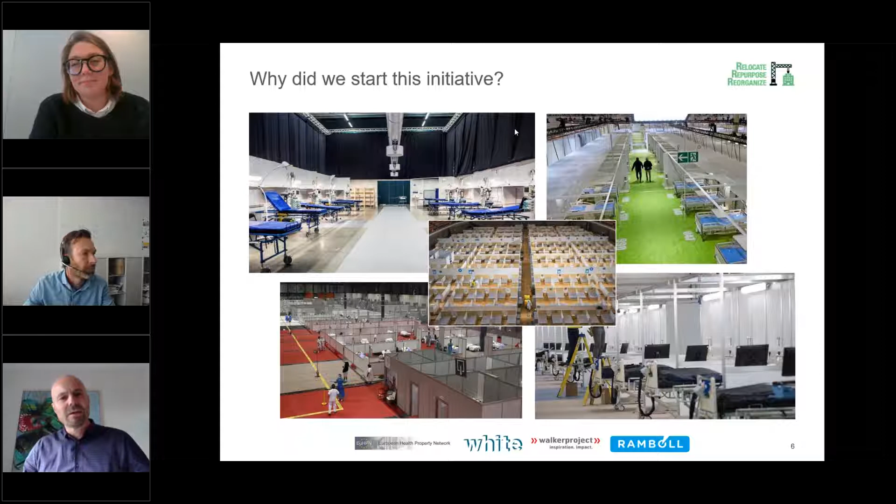If you go to the next slide, Michael, I will give you a brief introduction of how it really started. Back in March, when the pandemic started to pick up and everybody was running around, knocking on doors, trying to help out locally, we sat down and thought we really wanted to make some kind of a different initiative that would be of a more international scale. In this, I started to discuss how to do this both internally, but also with Walker Project and EU HPN, Jonathan, who both helped out in maturing this idea.

The overall idea was basically trying to make some kind of guideline to prepare and build facilities for the pandemic. I'll just say a few words on how this organization, or project, is built.

We are four parties in this. The EU HPN Walker Project was the initial one, but White Architects approached us and said this is a great initiative, we would like to join the team. Since we really needed different perspectives and approaches to clients, hospitals, and the general environment, we thought this would be a really good and diverse project team.

The funding for the project is given by the Ramboll Foundation, who supports society initiatives. So this is basically a completely non-profit initiative, and this is what we are trying to focus on.

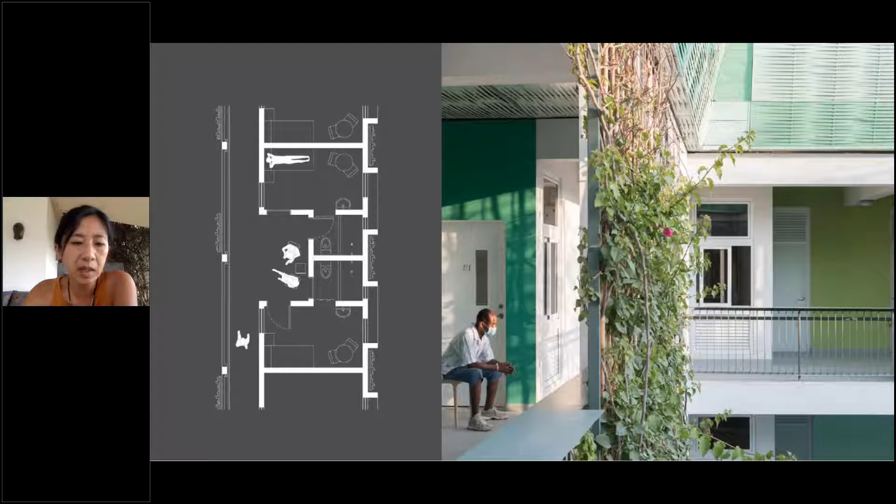We'd also built a cholera treatment center in Haiti, a waterborne disease that broke out there after the 2010 earthquake, as many of you are aware. We built an underground wastewater treatment system to clean and filter the water and ultimately stop the cycle of reinfection that was coming up from treatment facilities.

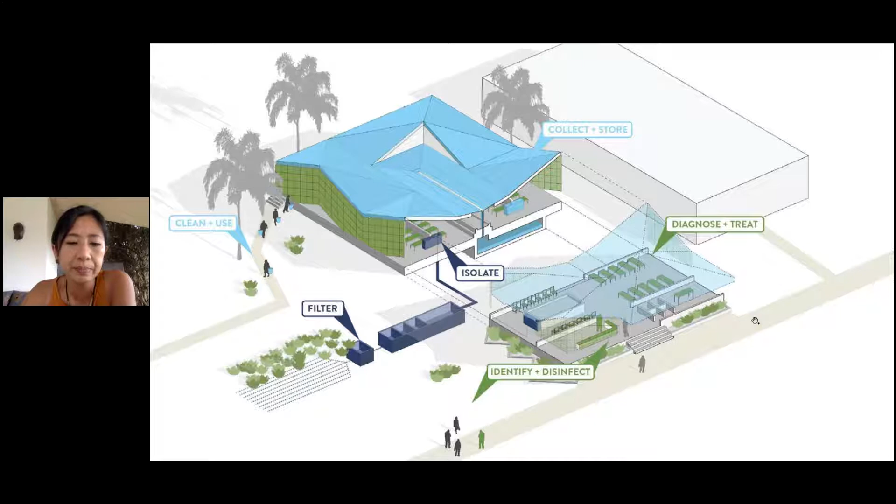The design of the space itself sought to bring light, air, and greenery into an otherwise very miserable and undignifying disease. Then in Liberia, after the Ebola outbreak, we worked with the government to build a 250-bed hospital, which was designed not only around air and water, but around rebuilding the public's trust in the health system.

Beyond those design projects, we'd also been developing spatial research methods, trying to look at how we can connect space and outcomes. We worked with Ariadne Labs, with funding from the Robert Wood Johnson Foundation, on a year-long project.

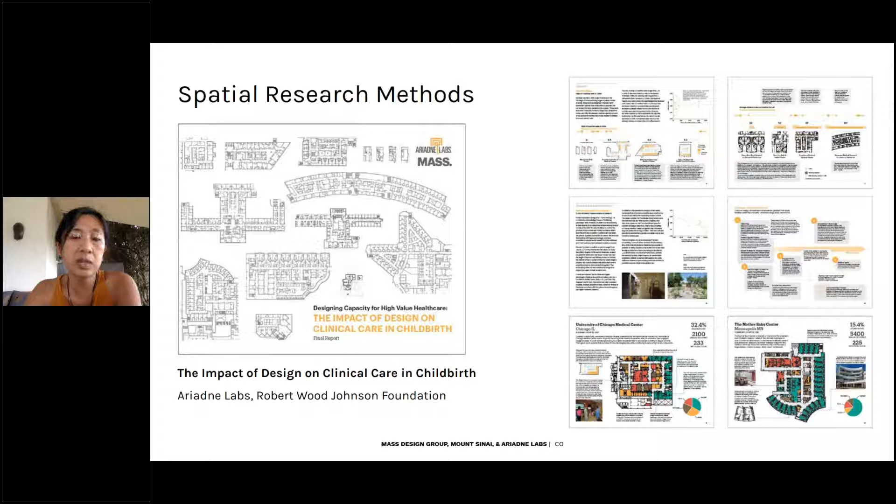This project aimed at looking at whether the layout of labor and delivery units was actually affecting the rate of unnecessary C-sections. Most evidence-based studies in healthcare look at the scale of the room or elements that are very definable, but we were interested in the system forces affecting how clinicians make care decisions. So we were looking at the maternity unit as a whole.

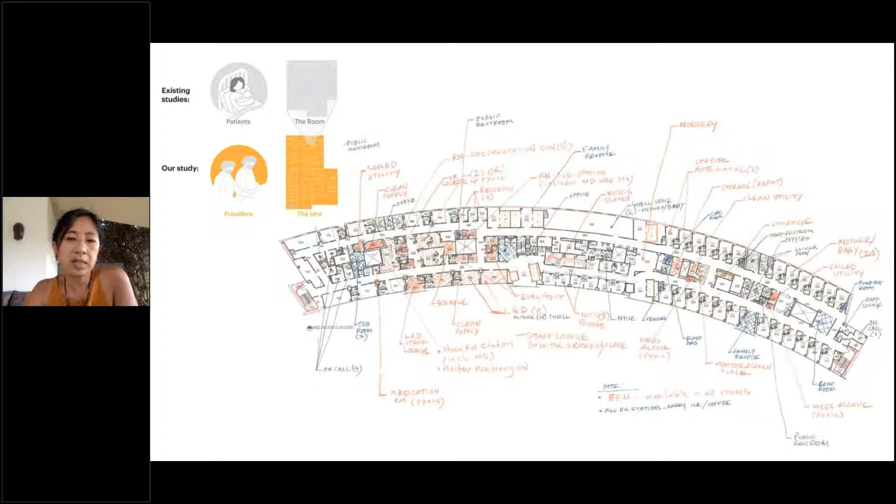We visited and collected data on case studies across the country, and we engaged clinicians to help us visualize the care processes that were going on. That ultimately allowed us to generate testable hypotheses that linked healthcare space design measurements to C-section rates.

We were able to publish the results of our work in some peer-reviewed journals, which we were really excited about. So that was all the background, that was the foundation.

In early March, when COVID was emerging, we'd begun developing some general resources for spatial thinking related to COVID infection control. So when we got that call from Mount Sinai, we were able to start very quickly.

What we recognized was that there were many hospitals implementing spatial redesigns on the fly without much guidance to prepare for the COVID-19 surge. So what we wanted to do was capture quick interventions that were working and share lessons to assist other facilities on how they could be more informed in moving forward.

So what we did together was document how spaces were being adapted by developing quick and nimble approaches to research and collaboration. The question we had to grapple with was, what does evidence and research look like when we're moving so quickly and without much guidance?

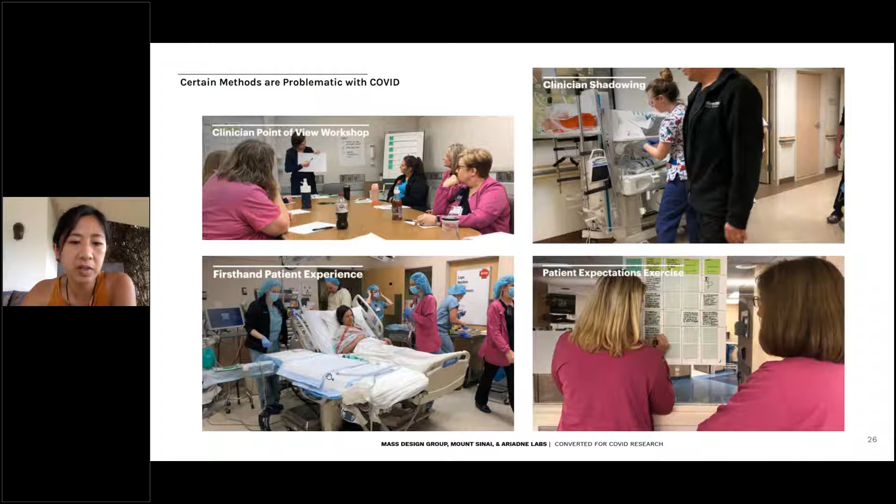We couldn't apply the methods we normally would, which would be clinician shadowing, holding workshops, running simulations ourselves to see how care processes work. In those early months of COVID, as Nicholas Kristof reported in the New York Times, it had been easier to be embedded in army units in Iraq or Afghanistan than to embed with doctors fighting COVID at that point.

So our research study lasted 3 weeks, and it was a rapid response spatial research method that employed a lot of different types of approaches.

Over Zoom, the doctors led us on virtual walkthroughs of active COVID care units, and we had to carefully outline what we wanted to see and have them do practice run-throughs on non-active floors ahead of time, in order to optimize their time on the COVID floors, keep them safe, and not impede the care processes.

Using GoPros strapped to their chest, they also captured time-lapse footage of COVID ICUs, which allowed us to go in and later look closer into the photos of what was going on.

We ran a series of interviews with facilities teams and clinical operations teams, people who were putting these changes into place. And then we worked with clinicians to have them also annotate floor plans to visualize how the spaces were being used.

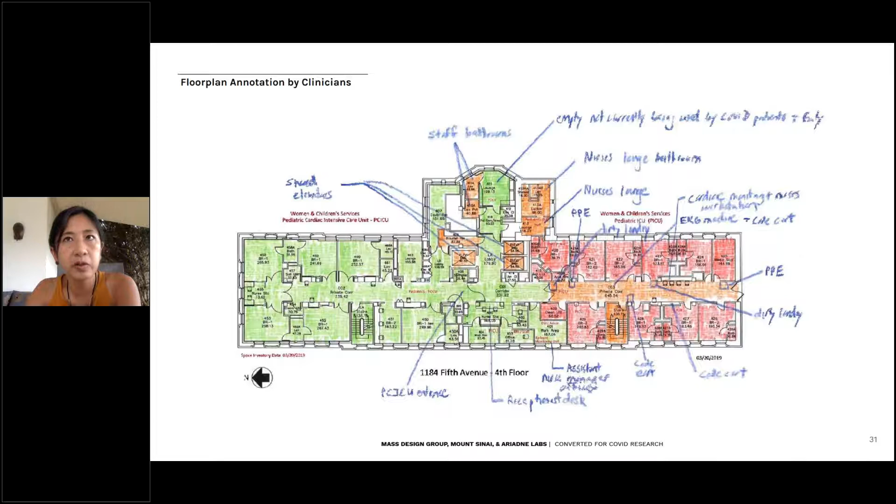Let me just go back to this for a second. I think from a personal standpoint, it was a really incredible and surreal experience.

As I mentioned, I'm located in Rwanda, so due to the time difference, physically I was sitting on nighttime calls in my kitchen, slapping mosquitoes away, and virtually I was touring busy intensive care units in New York City. I think this type of collaboration across geographies, across time zones, across disciplines was really incredible and felt very urgent and of the moment.

What we saw on those phone calls was some really unprecedented spatial change. And we saw a lot of critical care taking place beyond the normal confines of the patient room.

So at that point in mid-March, Mount Sinai had already begun radically transforming its care delivery system. They changed their main atrium, their main lobby, into a 100-bed step-down unit, and then built a temporary 68-bed tent facility across the street in Central Park.

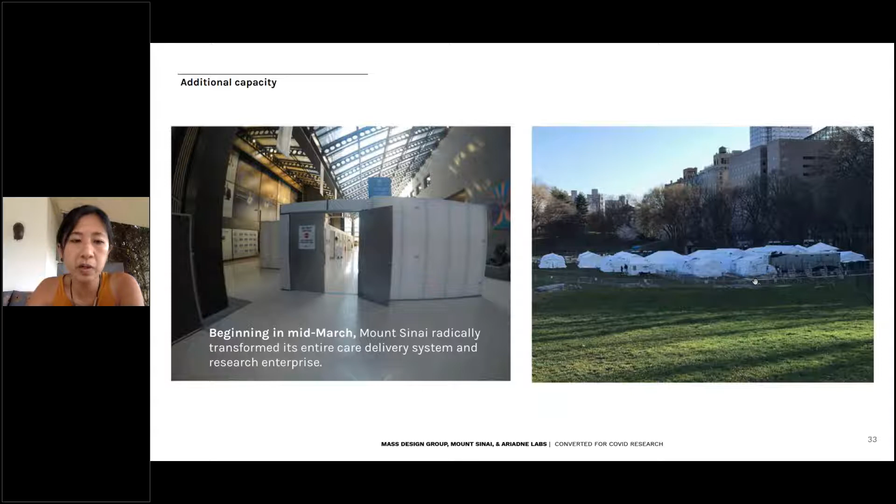And then within their existing ICUs and med-surg units, they transformed 260 existing patient rooms into negative pressure isolation rooms. For this example, in this ICU, the openings had previously been open, so they constructed walls and doors across the fronts of the bays, and brought in large HEPA filtration units set up to directly exhaust outside through custom fit wood panels installed in the windows.

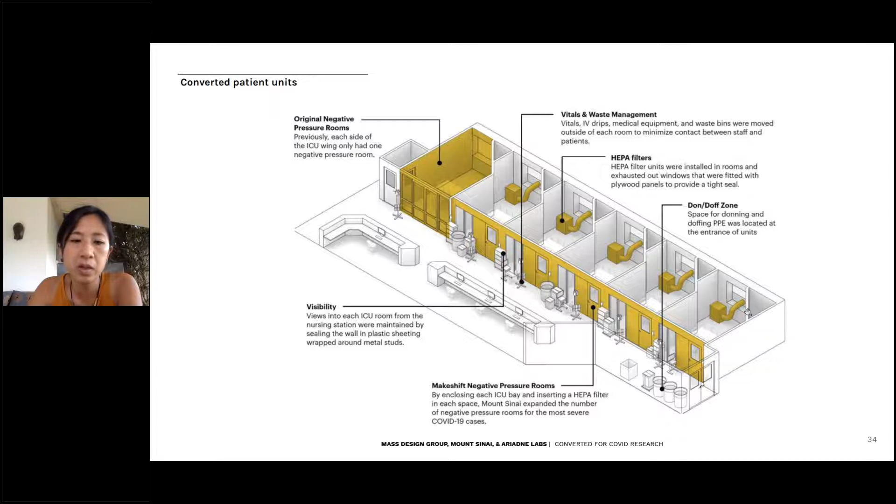The change at which these things took place was really radical. Here's a before and after of just one floor of the hospital showing how 3 intensive care units were converted. The buildings themselves were literally intubated to expel contaminated air.

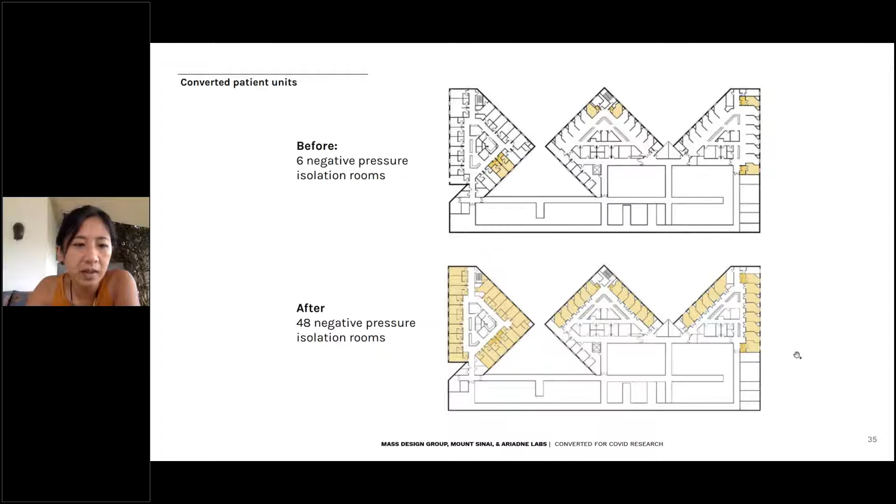I would pause for a moment to recognize the uniqueness of this floor plan, which was designed decades ago by I.M. Pei's firm. So it was an honor to be looking at such a historic piece of architecture.

So what we quickly grabbed onto was that the in-between spaces were really critical. A lot of attention was being paid to the patient rooms themselves, how to make them negative pressure. But all of these hallways were really where we wanted to address risk. In order to minimize clinician exposure in patient rooms while still allowing for that high acuity care to happen, these double-loaded corridors suddenly became the do-everything space.

They accommodated IV poles, patient monitors, PPE stations, waste receptacles, staff workstations, clinician rounding, and a lot of the care processes that had previously taken place in patient rooms were now happening in the corridors.

Many of them, as you can see here, were already narrow, particularly in an urban environment with older infrastructure that was limited. But when crowded with all of this equipment, as well as teams working and making rounds, this didn't create the safest conditions for healthcare workers. We recognized really quickly that enforcing proper infection control protocols in corridors and key thresholds like unit entrances was just as important as in the patient rooms.

So in the end, we looked at 3 different COVID-19 units: an adult ICU, an adult medical unit, and a pediatric unit. We found that amidst the really heroic efforts to transform hospital-wide clinical processes and infrastructure, there were a lot of adaptations that varied between floors and between units.

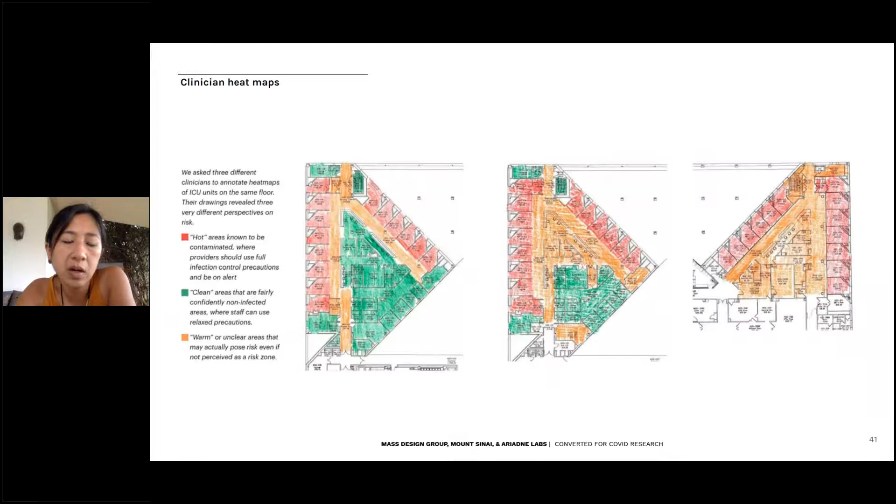So in the rush to expand bed and caregiving capacity, hospitals hadn't yet had the time or energy to develop human-centered design cues to communicate key information and enforce adherence to protocols and create order and confidence. Staff responding to surge conditions are often redeployed to unfamiliar environments with new team members, imagine coming to a new space for the first time with people fully gowned up, you can't tell who they are. Visual aids and design nudges, even simple paint or tape on the floor, can help lower infection transmission by making invisible risks more visible and orienting people, creating spaces that instill confidence and collaboration.

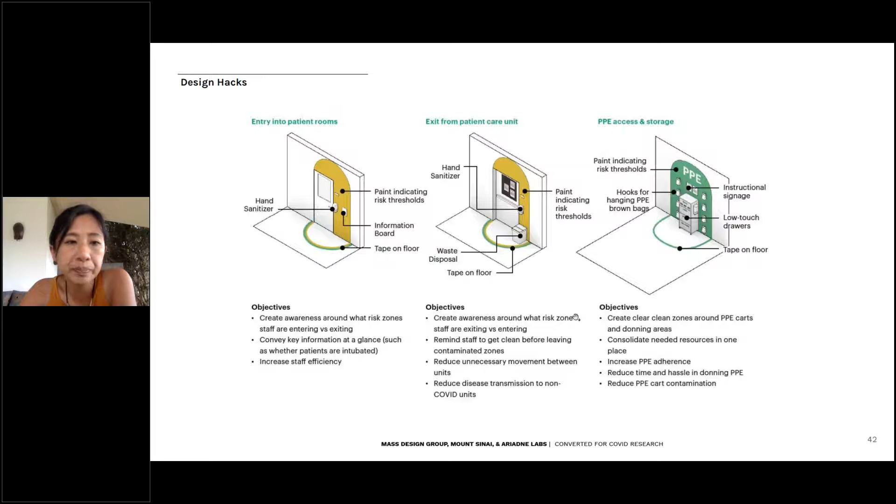This is a research project, and the lessons we took away from those 3 weeks were first, time is of the essence, and as designers we need to mobilize quickly, collaborate deeply, and leverage nimble research methods to respond in unpredictable, constrained situations out of our control. We also acknowledge that space has a vital role to play. The physical environment shapes how people behave, interact, and make decisions, and spatial literacy and design cues are key to indicating risk and standardizing behavior to keep people safe.

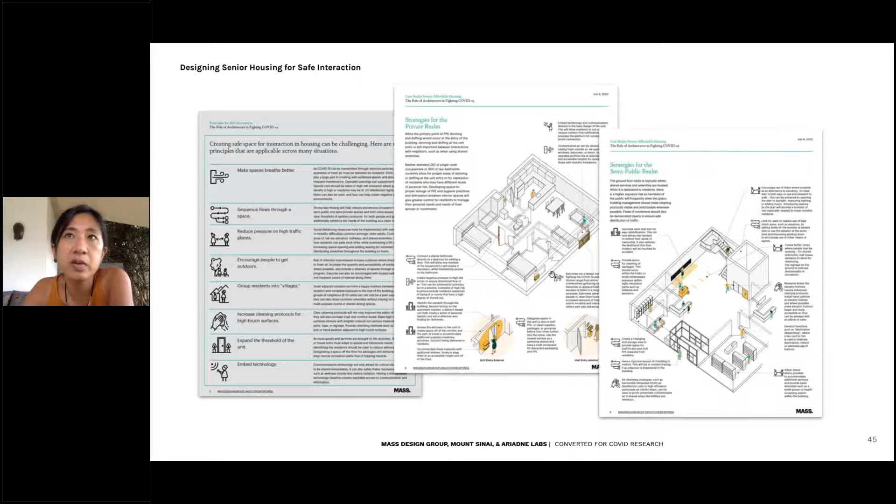After collaborating with Mount Sinai, we published a report of our research, now on our website, and we went on to develop other COVID design resources, including design recommendations for senior housing, hotels, restaurants, museums, schools, and even prisons.

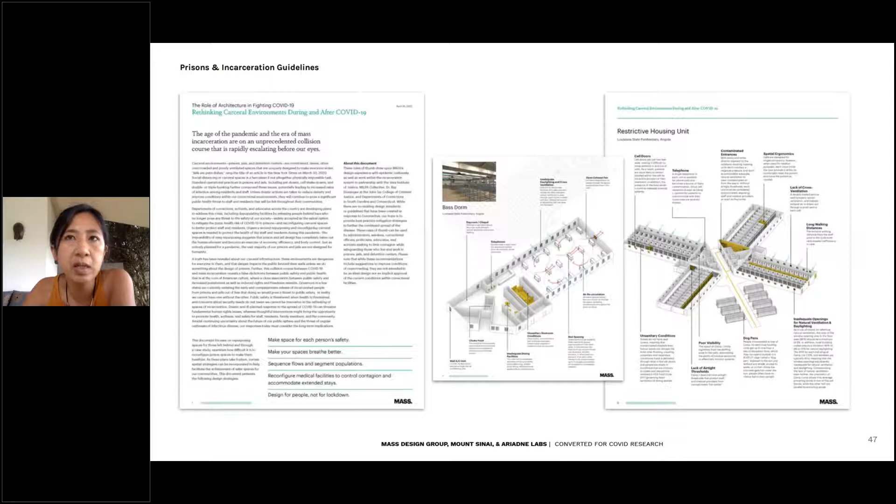Now our team is working to put together a learning collaborative of multiple health systems. We want to look at a broad range of facility types and geographic contexts in different moments of the wax and wane of the pandemic. We want to expand to look at a broader set of care delivery spaces, not just dedicated COVID care units. We want a broader definition of safety beyond infection control, but also communication, morale, and stress management, for all healthcare workers, not just clinicians. Ultimately, we hope to develop clear spatial guidance that can be used globally to transform hospital units in the COVID-19 era.

So to conclude, MASS's motto or thesis since its beginning has always been that buildings are never neutral, they either help or they hurt. As we all acknowledge, COVID brought to light a lot of cracks in our systems that were previously less visible. It revealed issues of equity, how interconnected and interdependent we all are, and that we need to be designing for health in the largest sense of the word. On the plus side, it's also created a bigger awareness of the role of the built environment in keeping people safe.

There's a lot more discussion in general media and among the public, no matter what community or field of work you're in, and people have an awareness of what spaces they feel comfortable in, the density of those spaces, and a tacit understanding of airflow versus stagnancy. I hope we can be optimistic that this will open up a greater appreciation and value for the role of design in all kinds of spaces.

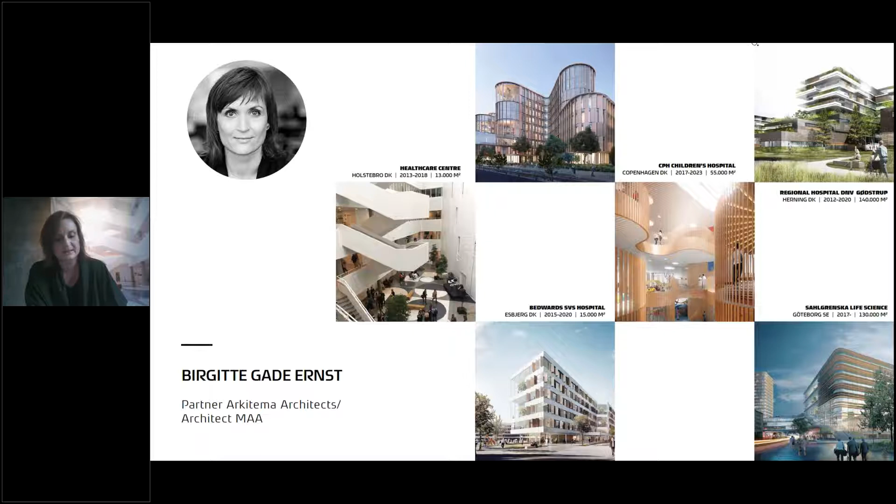My name is Birgitte Gade Ernst. I'm a partner in Arkitema Architects and responsible for our Danish healthcare buildings. We design healthcare buildings in any scale, from new hospitals like the new Children's Hospital in Copenhagen, to life science buildings and healthcare centers. We are Scandinavian, and we have a Scandinavian approach both in our architecture and in the way that we design patient-related design.

So first some background information. In the international press, I've read about the Scandinavian response to COVID-19, and I believe there are 2 reasons that the COVID situation is fairly manageable in Denmark. First, our hospitals are national. They're managed by the regions, but it's one system with a large degree of knowledge sharing, which has been useful in this crisis.

Secondly, as you probably know, Denmark is a welfare state. That basically means we accept quite high taxes in order to secure education, law and order, pensions, and indeed healthcare for everyone. So you can say we have a contract with the government that we pay, and in return they take care of the weak in society. That again means that when the Danes have shown this red and green COVID curve, and I explained the importance to avoid the red surge, to keep distance, to work from home, to wash our hands, we do this by and large because it's part of taking care of the weak. Also, if we fall ourselves, we are sure of help.

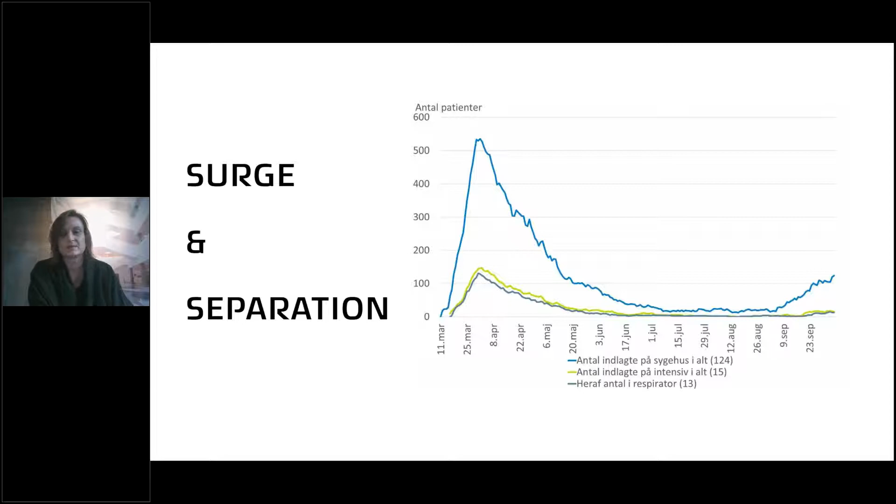So there are mainly two important aspects that we have learned from this pandemic, which is surge and separation, and these are the issues I will talk about. The figure on the right shows that in Denmark, in March, when it was worst, we had 550 COVID patients only, and today it's 124 at hospital, only 15 in ICU care. We have a population of 5.8 million people, so it's fairly manageable, but still we take care.

Regarding the surge, this has not yet been an issue in Denmark. We were warned by what happened in Italy, and we prepared accordingly. So Rigshospitalet and other hospitals quite quickly cancelled a number of elective patients, and also more nurses were retrained to handle intensive care patients.

Interestingly, none of the Danish hospitals were fit to deal with testing facilities. So in order to secure separation, testing tents were set up all around the country, and also here at Rigshospitalet.

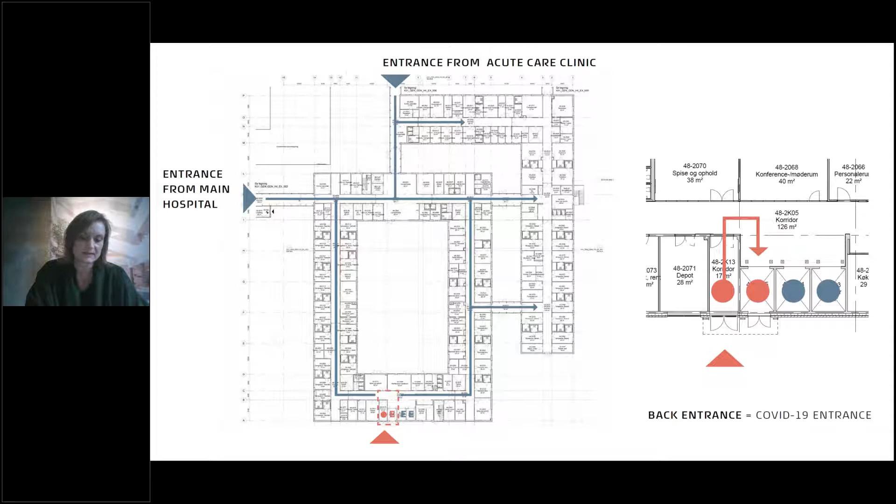You have this blue COVID-free zone. In effect, a tiny part of the footprint of the building is the COVID zone, illustrated in red. And the top floor is now a dedicated COVID floor. In this region, there hasn't been such shortages of staff; reallocation has sufficed. The single bedrooms, normally for mothers and newborns, are now used for COVID patients.

The single bedrooms have an advantage for the patient, as some of the equipment used for allocating oxygen, etc., actually makes quite a lot of noise. Imagine lying there feeling very sick, and it isn't helpful at all to have to listen to a machine that supports your neighbor's breathing. You could be next. So this is a very stressful situation that's avoided with a single bedroom.

So what do we take with us to the next pandemic? Will we build with redundancy to handle a future surge? I think in Denmark that's highly unlikely. Square meters are expensive, and the trend is to optimize and make hospitals as compact as possible. I believe in flexibility, as we've seen in this previous example in Zealand.

Will we design more ICUs in the future? Possibly. Will we have a focus on separation of flows? Definitely. This is something we can learn from COVID, and where we can help hospitals be prepared.

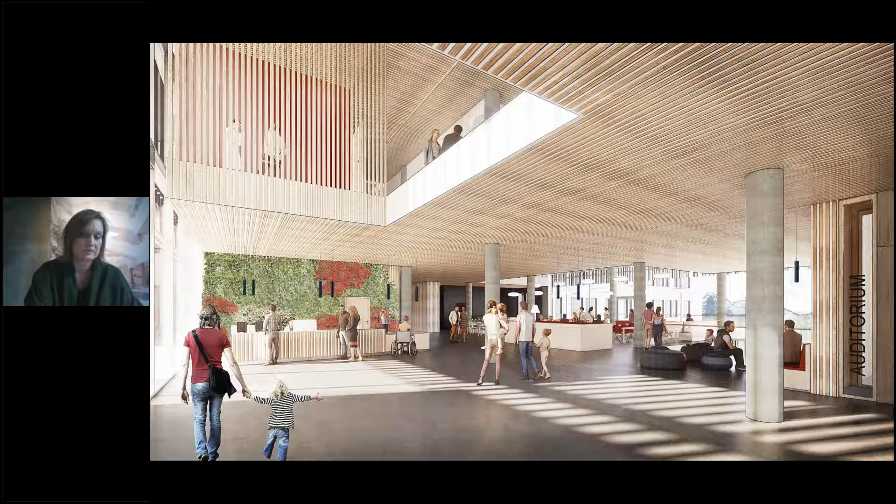Here's an early rendering of the main entrance. On the plan drawing, you see this main entrance top left. It looks like it's at the edge of the building, but the psychiatry isn't shown on this plan, so it's actually in the middle. If you turn left, you're in the somatic wards, and if you turn right, you're at the psychiatry.

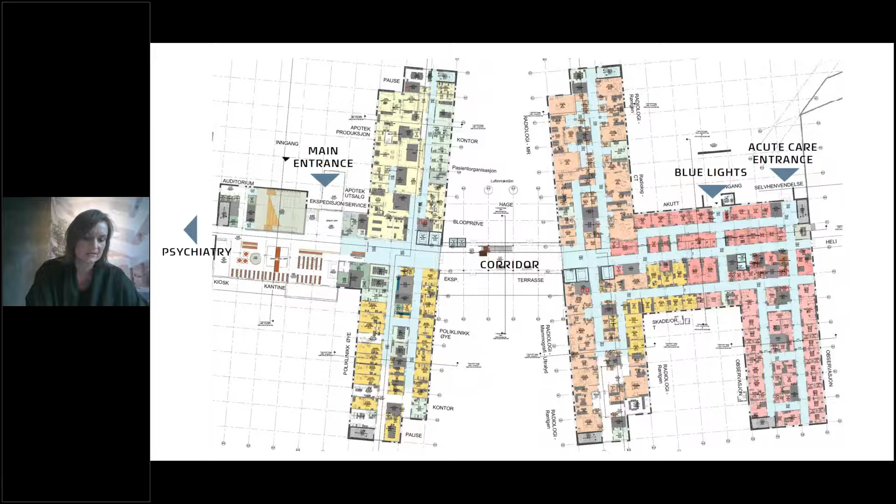To the far right, the pink in the drawings is the acute care, or the A&E, and in the middle you have this corridor connecting the two wings. Now this is the corridor. Notice the door - it's designed to gain access to common outdoor spaces.

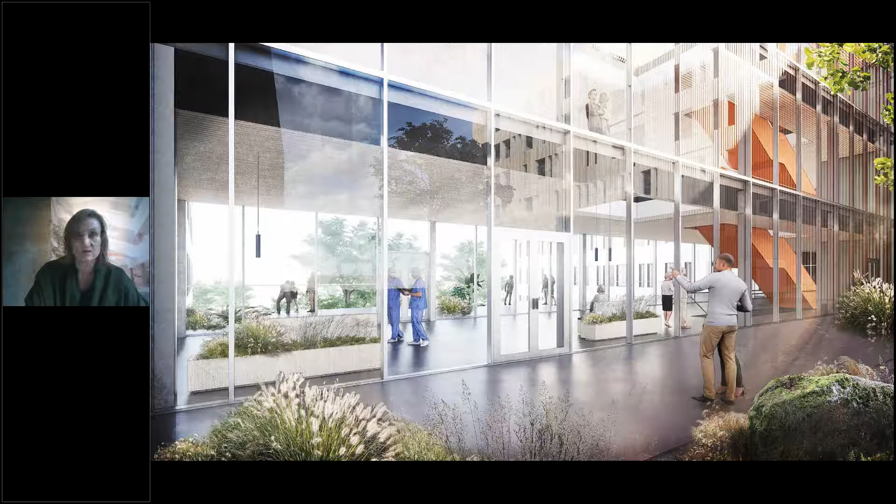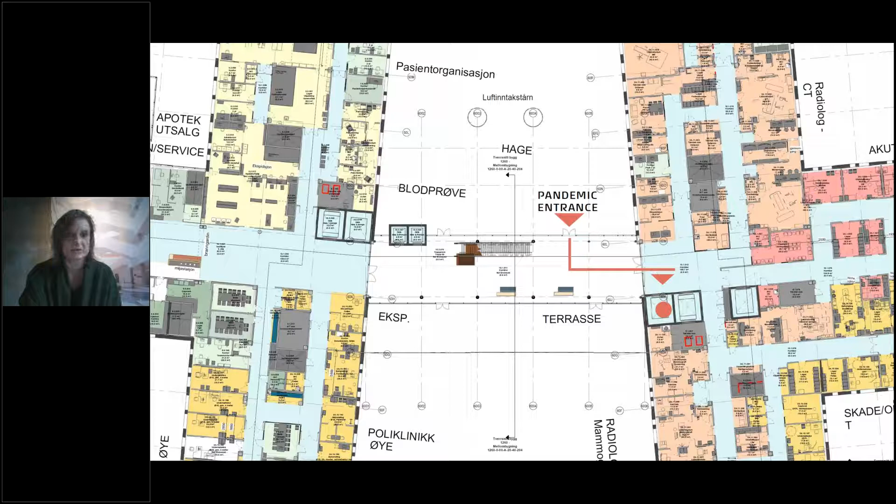It's also perfect for a future pandemic. The door is placed in close proximity to an elevator that can be dedicated to the purpose when needed. In this way, we can easily dedicate a whole wing to a new pandemic - you see the pandemic elevator, the elevators going to the other floors, and then of course the acute care elevator.

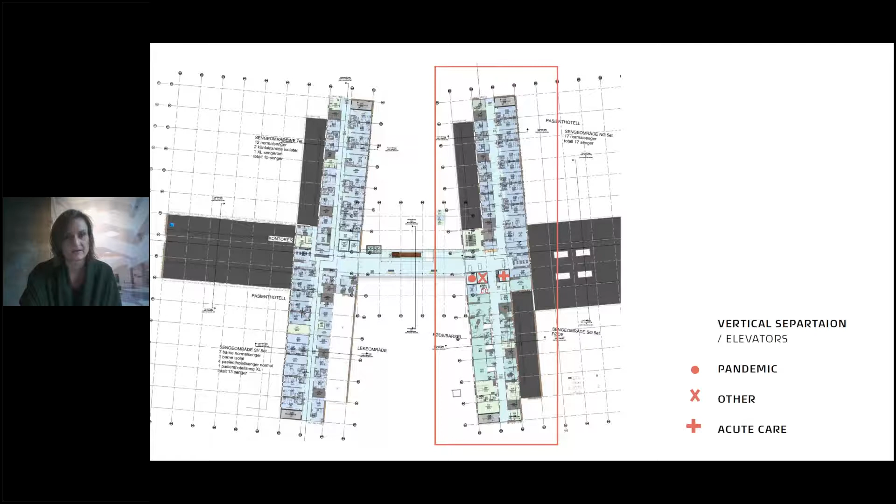And then a seemingly smaller thing, but still you have to embed it in the design from the start. We are currently adding more sinks to our design. Hand washing is preferred to the highly flammable hand disinfection. And this is quite interesting because it's sort of an old school thing. Years ago, we designed more sinks, and now they are sort of entering back into our projects, or at least into this one.

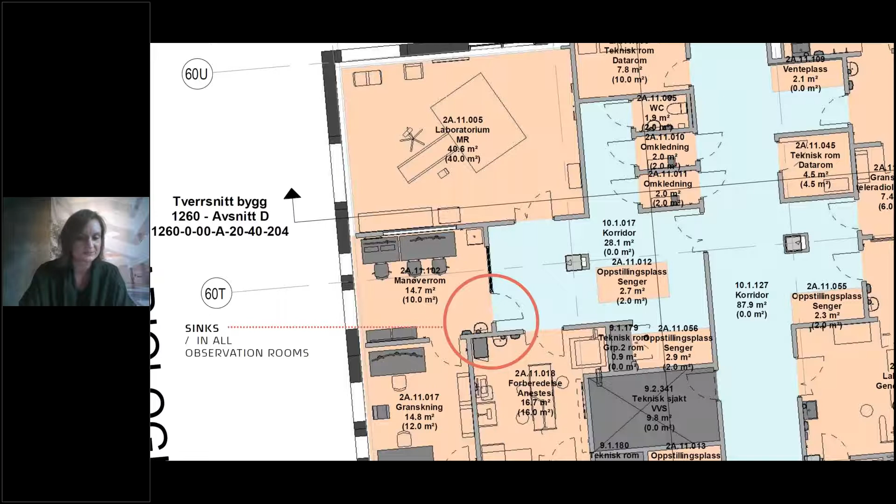COVID behind the scenes. The laboratory staff at this hospital were concerned that working with highly contagious substances, they would unintentionally risk infecting colleagues. Therefore, our initial big open lab space to the left has now been remodeled into 2 separate units and a 3rd room for equipment. So for the future, they can use 1 laboratory for the pandemic laboratory.

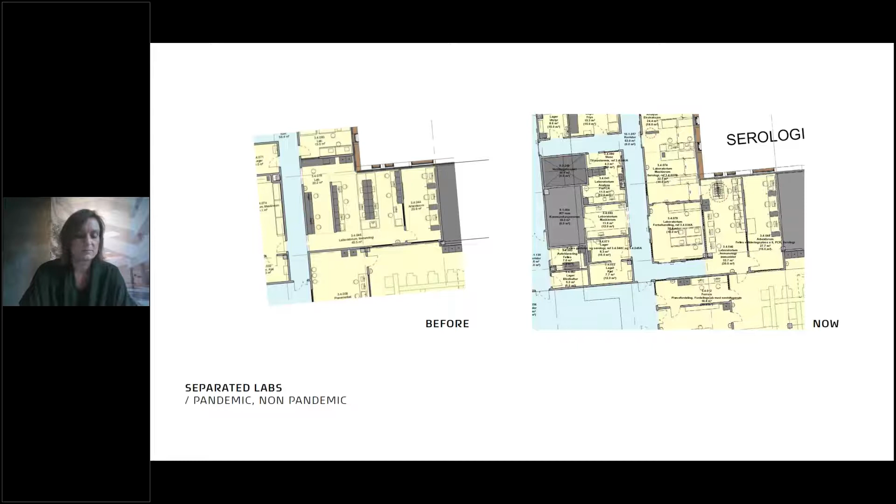So on the larger scale and the smaller detail, if we ask the right questions and use the experiences of the staff from the current pandemic, we architects do have the skills and the tools to help prepare for the next pandemic. Thank you.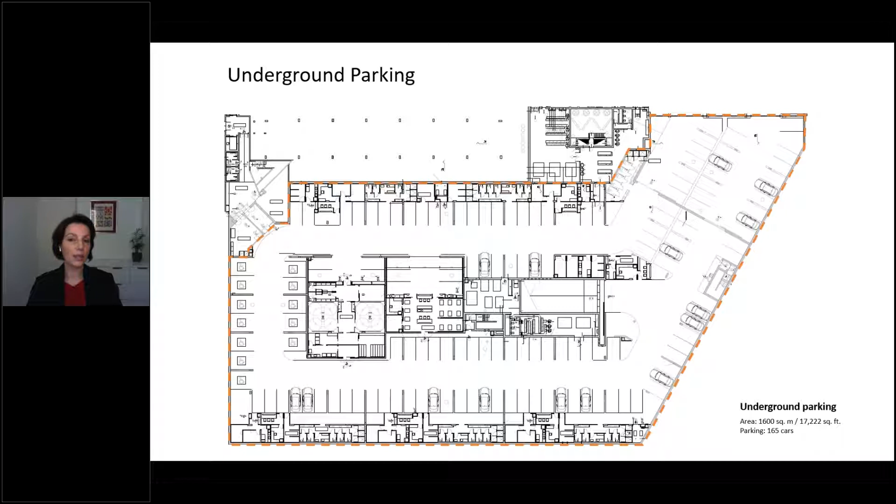As most of the hospitals in Israel, Sheba rapidly utilized in only a few days an underground parking structure that was designed to serve as an emergency hospital for times of war.

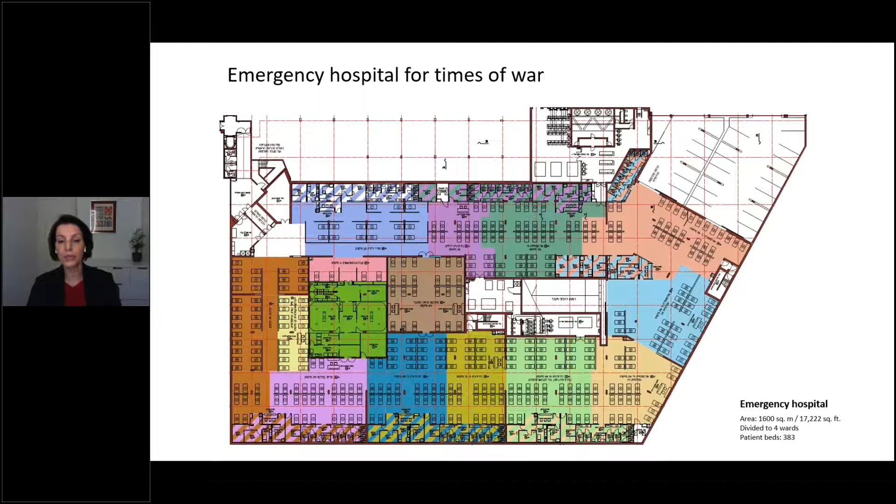Here you can see the layout with almost 400 patient beds divided into different medical divisions, units, and they transformed it into a critical hospital care for COVID patients.

The logic behind this decision was the intent to isolate the coronavirus patients from the rest of the operating hospital units and to save money and time by utilizing an existing structure.

The large side of the parking lot was divided into 2 ICUs with distinguished separation of clean zones and contaminated zones and controlled circulation routes.

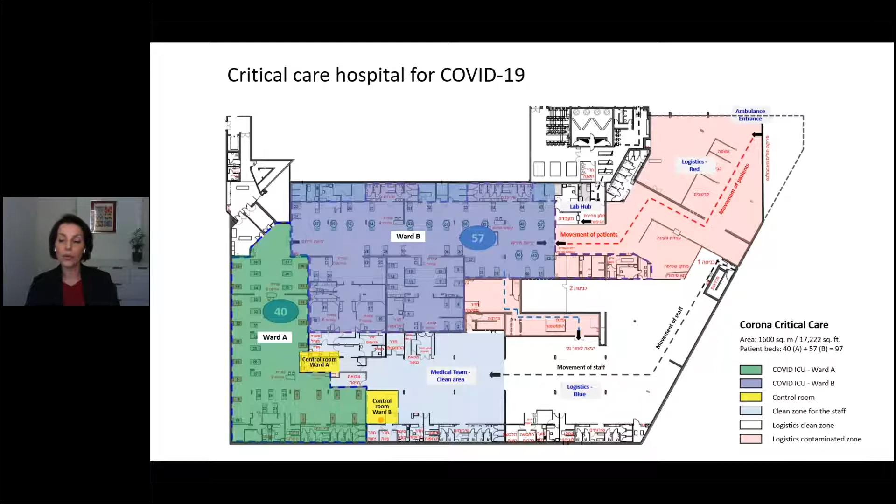The 2 ICUs have an open ward layout with contaminated zones. Ward A is colored in green and Ward B colored in purple. Both of them have a separate control room in the clean area, which you can see colored in yellow.

The control room has telemedicine devices to remotely supervise, communicate, and control the operations of the unit. The units have different models. The control room in Ward A is adjacent to the unit with a big window.

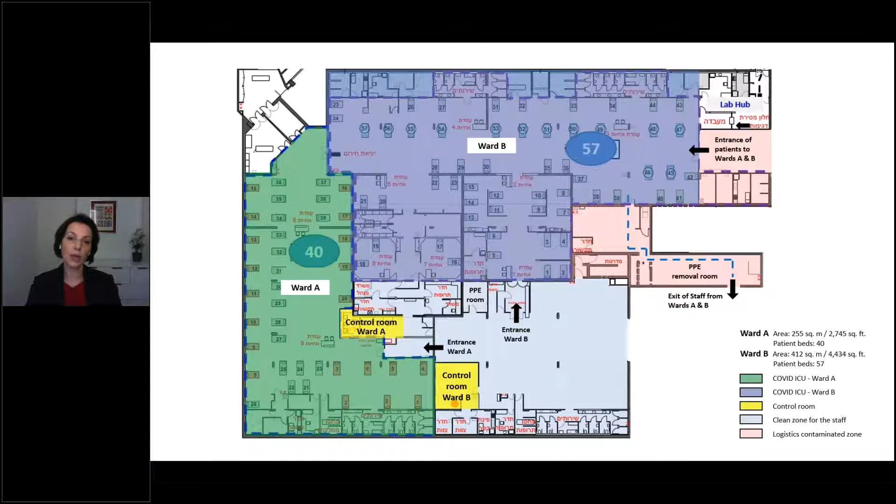The staff was divided accordingly into 2 teams, one working in the contaminated zone with full PPE, while the other team supported them from the control room, working in shifts of 12 hours and switching every 3 hours. So here you can see really an example of how the layout was designed to support the new model of care, using telemedicine as a means to operate, communicate, and really care for the patients.

The hospital employed different telemedicine technologies, and Israel, known as the startup nation, chose to invest in medical technologies and innovation to cope with the challenges of COVID-19.

The technologies for remote care support monitoring, physical examination, management, and audio-visual communication, including video cameras and telepresence robots.

Most of the technologies that were implemented at Sheba were not new. Some existed in models of electronic ICU, and others were used for special programs of the hospital to monitor home rehabilitation of patients. And not all of them were implemented in the ICU.

In our study of the new model of inpatient telemedicine, we explore the intersection of architecture, technology, and healthcare. So this is really a multidisciplinary research.

By doing so, we really emphasize that the built environment has an impact on the implementation of digital innovation in healthcare services, something that is often not really taken into account, the impact of the built environment on the implementation of new technologies.

We focus on the shifting forms of visibility, a major theme in healthcare design that is transformed by telemedicine and physical materiality. While previous studies focus mainly on physical visibility or on virtual visibility only for communication with patients at home, we suggest integrating the physical and virtual forms of visibility in inpatient care.

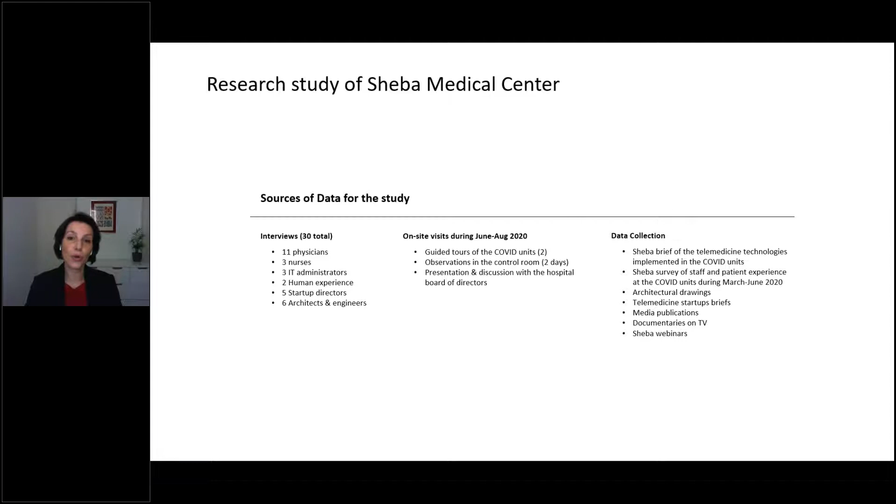The interviews and observations really reveal the impact of the shifting forms of visibility on the performance of the unit. For the management, many stated that they were missing an overall perception of the whole wide world that enables them to see everything entirely at every moment.

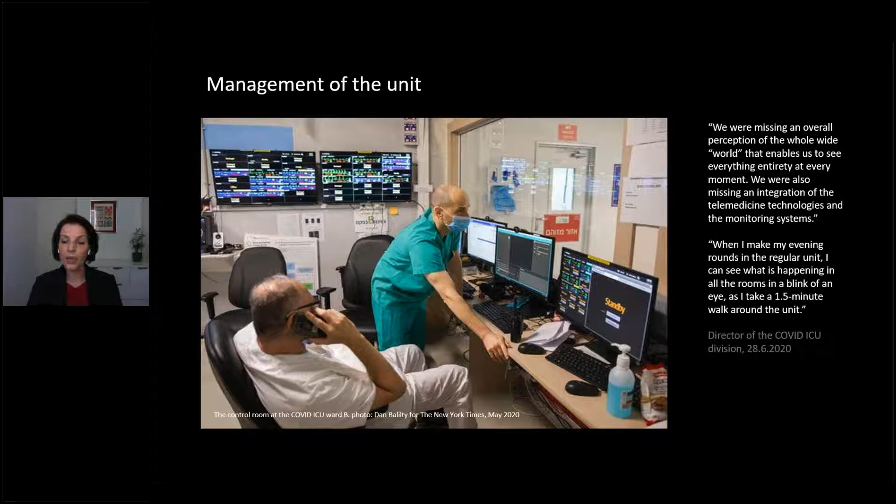The director explained, "When I make my evening rounds in the regular unit, I can see what is happening in all the rooms in a blink of an eye, as I take a 1.5-minute walk around the unit." The segregated view of the unit on screens does not provide a spatial perception of space, which was found to be crucial for orientation and a sense of control over the unit. It also is missing an integration of the audio-visual technologies and the monitoring systems. And mainly, they simply have a lot of screens to look at to operate the unit.

To overcome this limitation of spatial perception, they actually had an innovation. Since they were already in a parking lot, they came with the idea to use a mini car, a closed club car, to drive through the patient's beds and have a better perception of the overall unit. And by using the car, the directors didn't have to put on the PPE because it was closed, but they had to drive through a special car washing machine to clean the car when they came out of the unit.

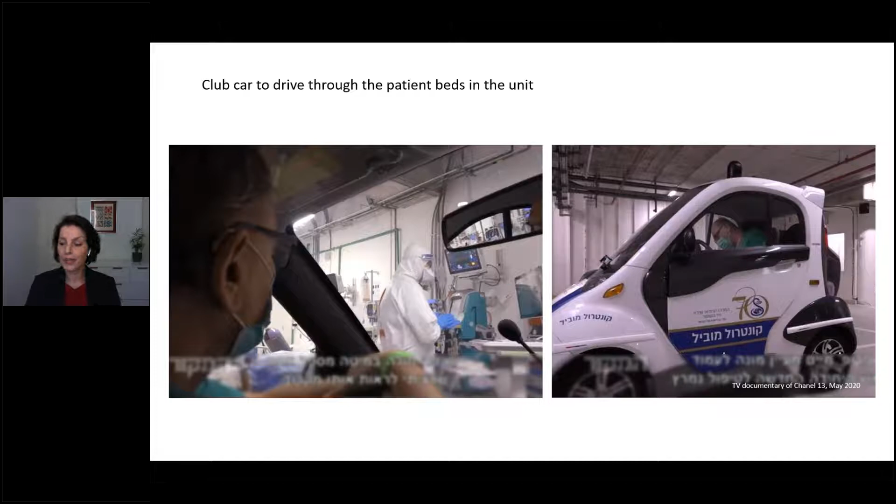The robot was defined by all the staff as the most efficient piece of equipment. The director explained that it provided them the option to move from place to place, to see more than one angle, to distance and focus, while the person on the other side can actually see the face of the person who was speaking to them. They described it as a game changer.

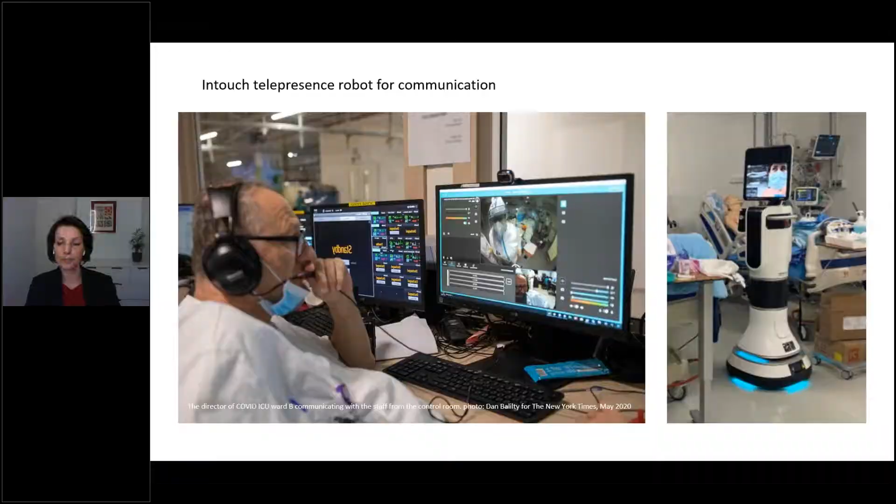The different layout of the wards had an impact on the implementation of telemedicine technologies. Each unit created different models for teamwork and collaboration. Obviously, the staff in Ward B without the window used the cameras and the robot much more than the staff in Ward A. The window was significant for visual communication of the staff, but the acoustic barrier led to low-tech solutions such as hand gestures and handwritten notes.

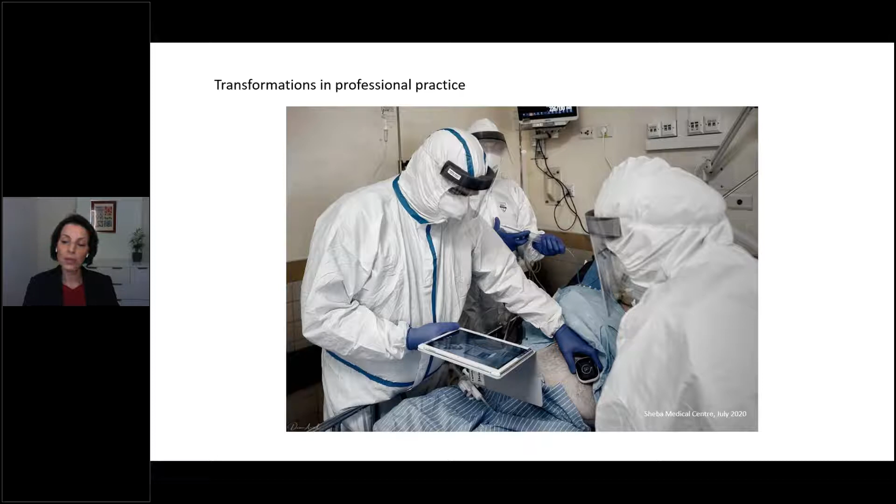The use of telemedicine technologies also transformed professional practices. For example, here you can see how the physician is using TytoCare, which is a device to remotely examine the patient at home, actually at the bedside, because he cannot hear through the stethoscope covered with the PPE. So here the technology was used as a means to visualize the patient vitals.

The new model of care also shifted the distinguished hierarchies of the staff in the medical unit. The head nurse explained to me that the PPE covered any characteristics of the professional role. When help was needed, any pair of free hands came to the rescue. It did not matter if it was a doctor or a nurse.

Telemedicine was also used to prevent cross-infection by supervising the staff behavior, to make sure that they are changing their additional cover and gloves when moving from patient to patient. And this is really important to note that usually when the staff move from one patient to another in a regular ICU, they move from one room or one space to the next room, and they go through a space where they can wash their hands and change their outfit. So the built environment supports infection control. But here they only do 2 steps and they're right with the next patients. So really the cameras and the robot help to supervise their behavior.

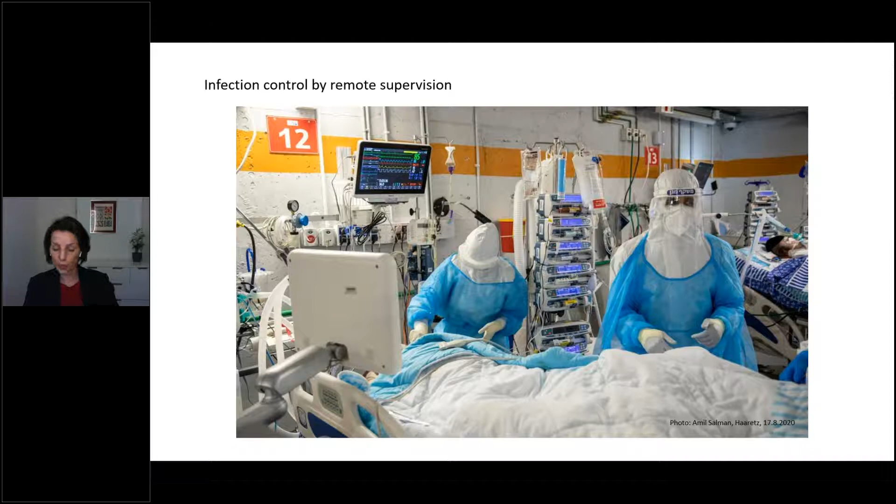The conception of patient-centered care has changed. The physician stated the challenges of remote care, the frustration of not being able to place your hand on the patient when you give him bad news. But on the other hand, they state, I can be there for them even when I'm not physically present.

There was also a lack of privacy for the patient, as the curtains were often removed because of the cameras. A resident doctor shared his concern. In this situation, the conscious patients witnessed the deterioration of other patients. They could see only a few meters from them what they are going to look like in another 3 to 4 days. It was a horrible experience for them.

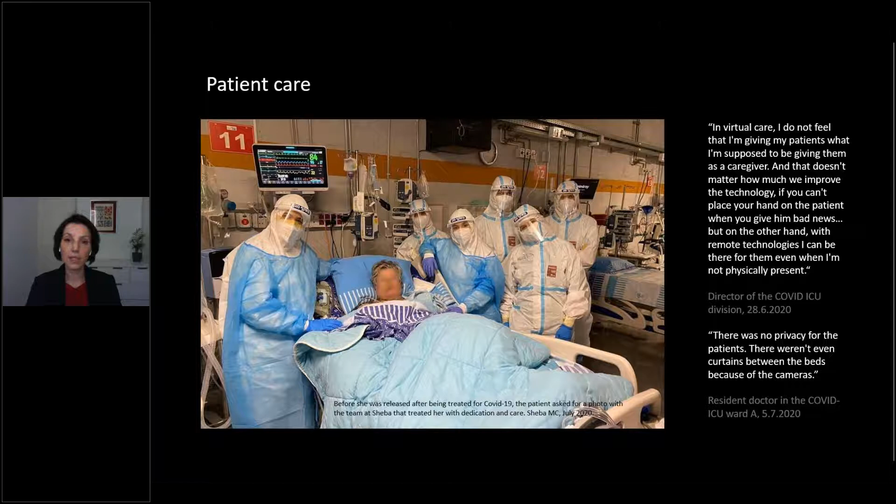Loss of identity by the PPE was also very significant. And here I would like to share with you a short anecdote.

One of the patients who was ventilated for an extended period of time came to visit after he was sent home and cured, to thank the staff for their care. They asked him what he remembered from his experience in the ICU, and surprisingly he said the only thing he remembers is the nurse on skates.

The team was amazed and tried to understand what he meant. The director explained that what he probably remembered was the robot. He explained that all the other staff were people without faces, like aliens covered with masks, so the video on the robot's screen was actually the only human face he saw. This really represents, in my opinion, the shift in our conception of the relationship between human and technology.

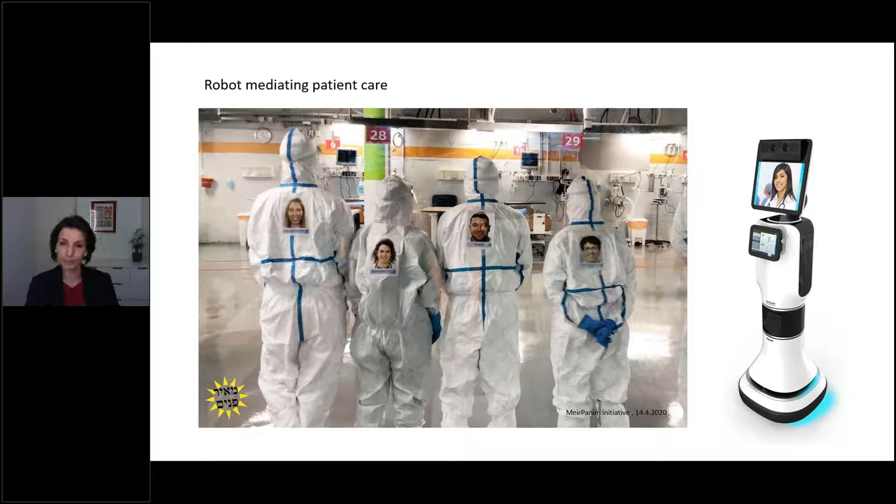Family support was also a major issue with COVID. At the beginning, the hospital restricted visits to the unit and provided only virtual communication from home or from a special family center built especially for families. But they soon realized that families needed physical contact with their loved ones.

One of the directors shared his surprise when he recognized that this was also significant even for ventilated patients. He stated: one patient shed a tear, and the blood pressure and pulse of another went up, when a family member came to visit them.

The location of the COVID ICU in an underground site, with no visibility to the outdoors or daylight, had an impact on the well-being of patients and staff. One clinician told me it felt like working in a submarine. He stated, I think the staff developed PTSD and a high level of burnout because of the underground location.

It was caused by the place itself and by the general situation—you cannot separate the two. Another physician revealed that many patients who were not ventilated would beg him to be moved out.

Thinking of similar temporary emergency hospitals constructed in Israel and all over the world without daylight or view to the outdoors, I wonder if they will become permanent solutions after so much money and resources were invested in them. I believe that when creating a high-tech environment, the basic principles of evidence-based design to create a high-quality environment should not be compromised.

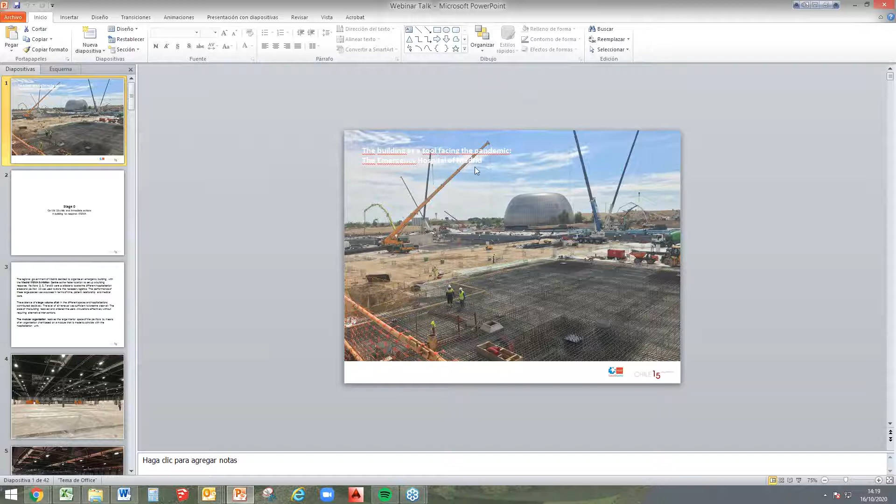We can hear you, Eduardo. Okay, do you hear me? Yes, we hear you, we can't see you yet. No, there we go, now we can see you, and your presentation is in presentation mode. Cool, thank you, that's perfect.

Well, thank you, Michael, it's a pleasure to be here. I would like to start with a short presentation. I'm Eduardo Terán, I'm a Spanish architect. Now I'm architect at Chile 15 Arquitectos. We are a Madrid-based office.

The presentation we bring today is how we are dealing with the pandemic situation from our architectural perspective in Madrid: the building as a tool facing the pandemic, the Emergency Hospital of Madrid. I'll talk about this building that we are now finishing here in Madrid, built to face the challenges that the pandemic brings to our society.

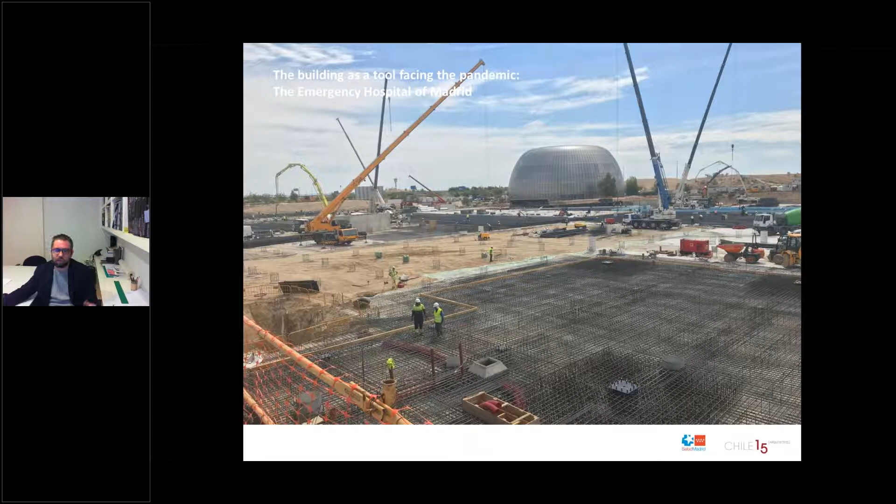I divide the presentation into 3 stages. First, I'll talk about stage 0, about what brings us together here, the history records. In the first stage, how we implemented the design of the building, and in the second stage, how we are building it. I'll take the 3 phases of the design together so we can have a global perspective of what is happening now.

Stage 0 is what is happening now, the COVID-19 crisis and immediate actions. It's important to say that the COVID crisis came to us. The administration of the regional government of Madrid, the Community of Madrid, and the healthcare department brought the idea to use a big building we have here, a pavilion typology, to implement as a temporary hospital. This building is called IFEMA.

IFEMA is a building provided for fashion and commercial events. It's a very big building, and the first idea was that we could use this building as a temporary hospital. The Madrid IFEMA Exhibition Center is the fastest location to set up a building response. We have several pavilions, we habilitated some of them, and we have 2 key points in order to achieve this kind of hospital response.

One key point was the existence of a large volume of air in different spaces, because when we have a big hangar, we can move a lot of air and organize in a better way what we're designing as our response to the COVID crisis. As well, the modular organization: if we have no walls, if we have a plain building, we can organize very well and straightforward all the pathways and all the programs to come together.

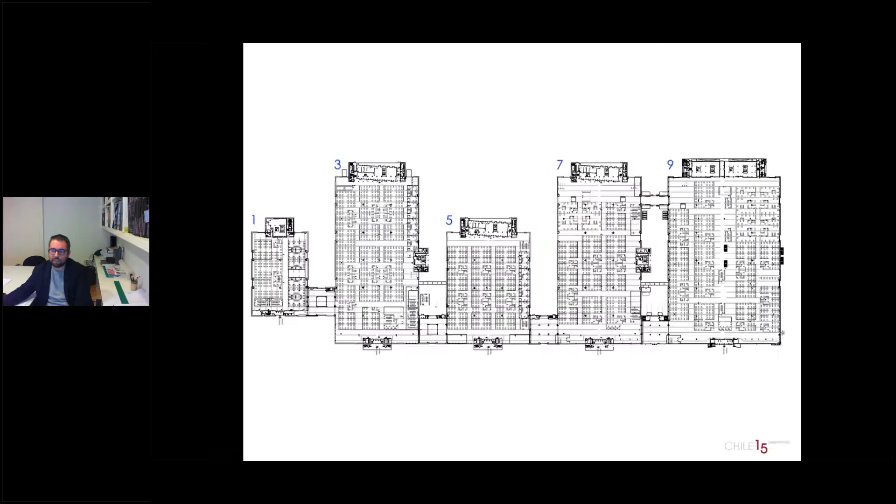But it was the very first effort that we made, not only as an architectural studio—this project involves a lot of companies, a lot of people, public agents, state agents. So it was like the first step we made against COVID. But something happened when we were on this path.

This building is not private, it's a private and public mixed-use building, so we couldn't use it as a temporary hospital forever. It has its own agenda, so we needed to do something extra. And it came to the table the idea that we could make a building replicating this model that worked well for everyone in terms of design.

Yes, the idea was, well, we are going to make a building that could be used as permanent infrastructure against the COVID crisis or future pandemic situations, as well as implementing other uses we need, for example material and logistics, as well as office and administration. So came the idea to make this hospital, an emergency hospital in Madrid called Isabel Zendal, named after one of the first nurses of Spain in history.

And what are the needs of this building? In response to the need of detecting the impact of the COVID-19 virus, with particular relevance to the city of Madrid, we promote a building to dispose for future emergency situation coordination. That was one of the main key points of the next phase of design. We have several administrations in Spain, so it's important to have a point to coordinate all the actions of the hospital and society against these situations. As well, the complex will work as a hospitality complex, but it will also have material and logistic reserves.

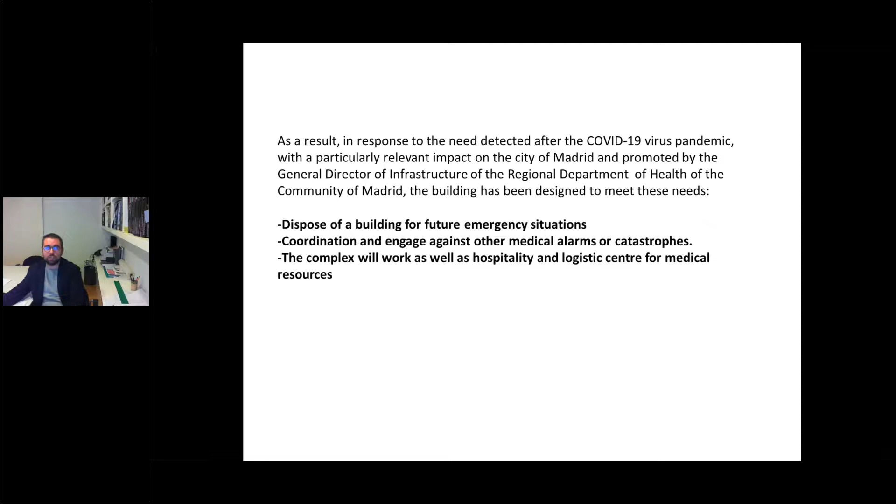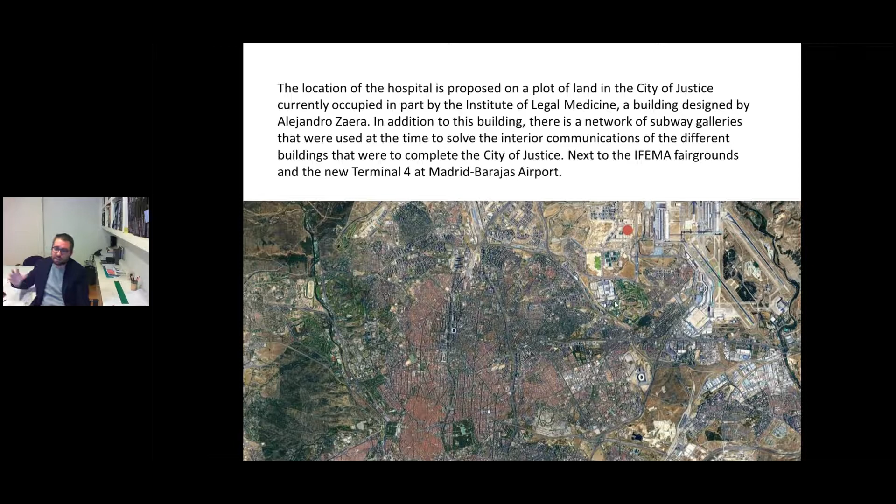For people who are not used to the city of Madrid, this is the city of Madrid, and this is the airport. So the strategic location of the building will be here. It's a new development area, and it's very close to the airport, very close to the connection with the city. So it was a good place to start thinking about the design for a hospital.

It happened - this is the presentation. This is the floor area, the plain area where the building is going to be fit. This is our site. So the building is going to be - it's important to say that there was a pre-existence, a previous project set up for this place.

I don't want to spend time explaining it, but it was like a city of justice for administration, and there was a gallery and some tunnels here, so there were some difficult works in the foundation. But I don't want to spend time explaining this because it's very complex - it's only to say that this is our site, and this is one of the buildings of this previous complex that is built. This is the Alejandro Zaera building, an office for administration that is now integrated into the new hospitality complex.

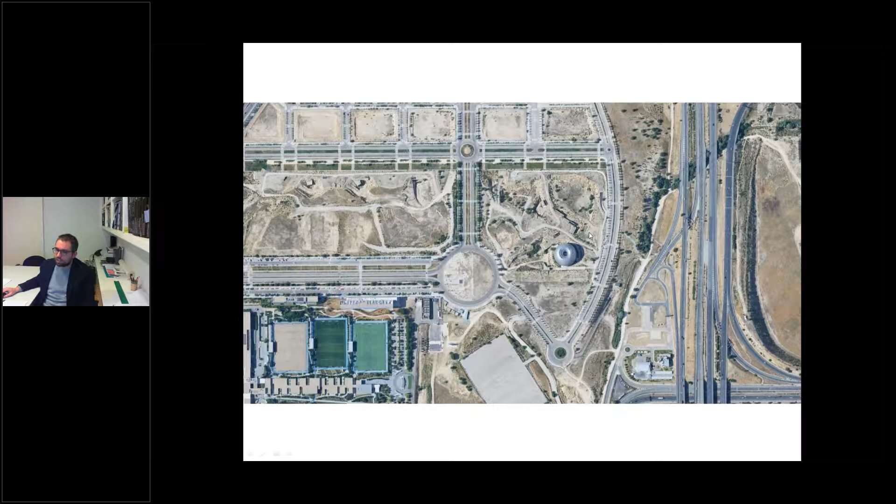Well, what are going to be the definitions of our design? First of all, the definition of a module - we are going to work with cells. This is very important in how we live, how we see, and how we think about this kind of building. A modular cell that brings together a common set for the building is going to give us modular construction versatility, so we can implement different private agents and contractors in order to speed up the construction of the building.

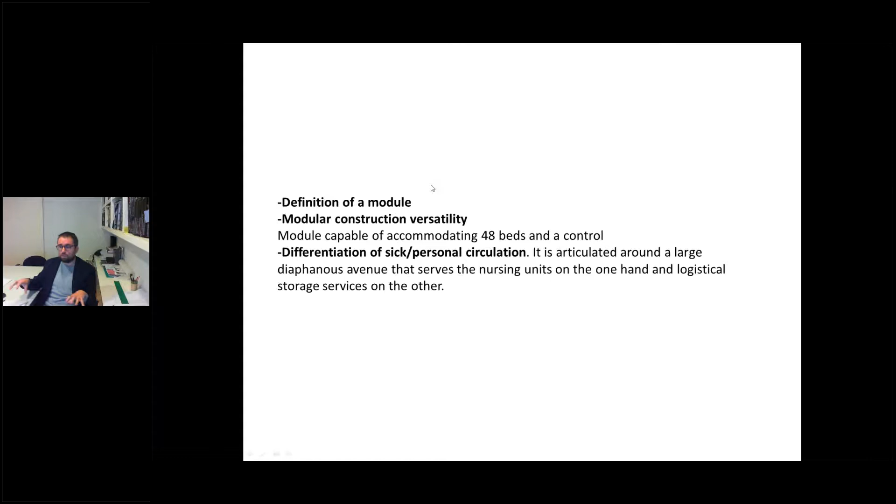And we are going to differentiate the pathways. The pathways are fundamental in this kind of hospitality area, so we could separate the personal circulation, and we move between these cells. We could have an easy model to respond - that was one of the main tasks, to set up this kind of building.

As well, we are going to provide an office administration building for the regional government of Madrid. We are going to provide a storage and facility area to relocate and hold all the clinical material that Madrid is gathering in the city for future crises or for this pandemic crisis. And we are going to have some buildings for energy. This is the building I explained before, one of the Alejandro Zaera buildings of a previous complex, and we are going to integrate this into the whole hospitality complex.

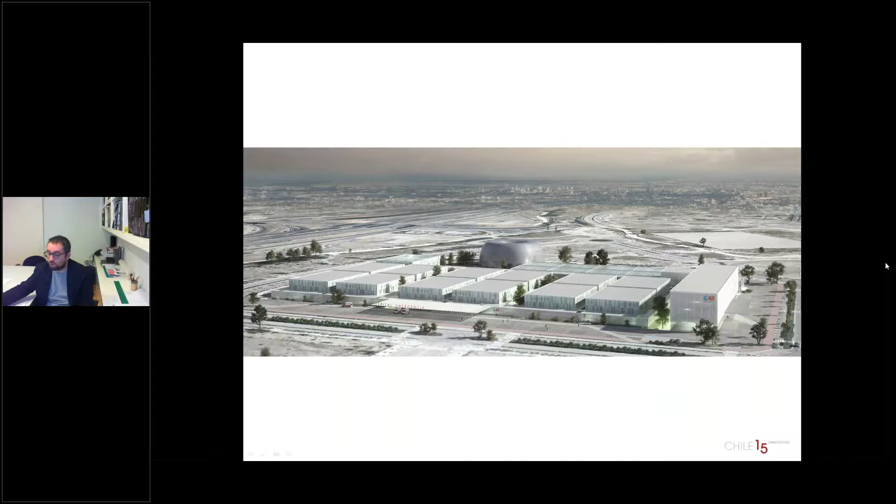But I think we want to preserve this idea of a big building, but with the optimal scale to have this kind of pavilion, so it's not seen as a common hospital. It has the advantage of the buildings for fairs and exhibitions that we have in Madrid and in many other cities.

Now I want to go to step 2, where we are going to talk about how we build this, or the process that is taking shape in order to bring this building to reality: the construction of the emergency hospital.

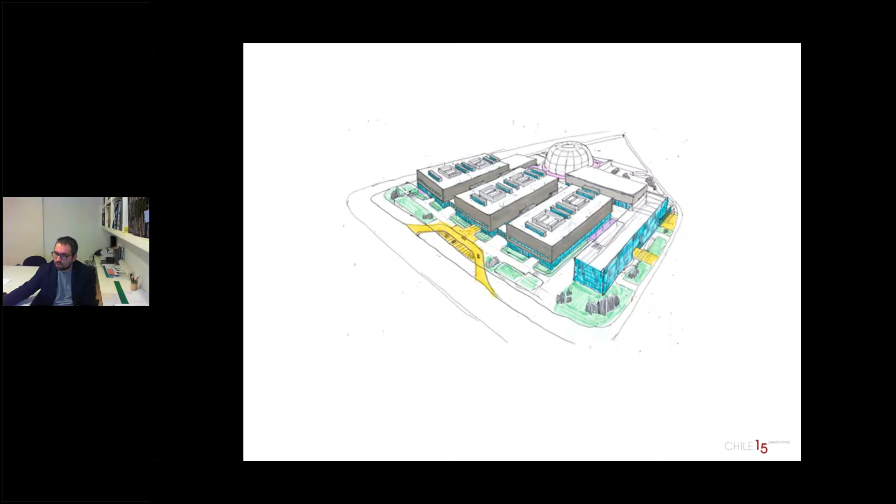It's important to note this is one of the main drivers of this project: we are in a fast track. The main idea of the fast track is that we build what we are designing at the same time, so there is no time for a large design period. We have to implement it very fast.

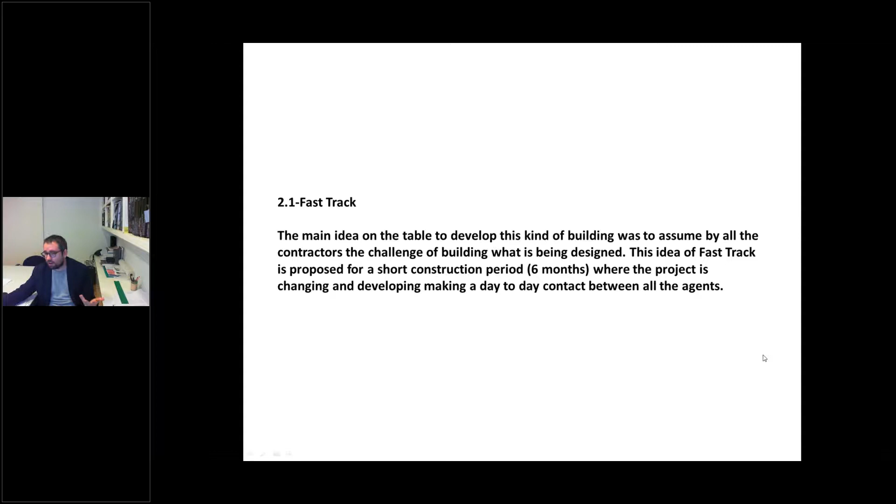We have people waiting on the construction site for our design, so there is a close relationship between all the contractors and all the designers. This means the building has a kind of life spirit happening on site, built from what was designed just hours before. So there is a challenge: we are going to build something without mistakes in a short period of time.

This is a high pressure design that requires regularizing and normalizing, thinking of the whole complex as cell units in very easy, affordable parts.

I want to stop here a little bit. This is the main floor plan of the building. As I explained before, we have here the main 3 pavilions of hospitalization. One of the three pavilions will be in reserve; it will be operational if needed later, but nowadays it's just being completed and will remain empty on the ground floor. These are the other buildings, the administration area.

The hospitalization areas are here in green. We planned, per the ambition of the community of Madrid, a building for 1,000 beds, 30 beds per unit, and we provide these big spaces for all the hospitalization units, as well as one part for intermediate and intensive care units.

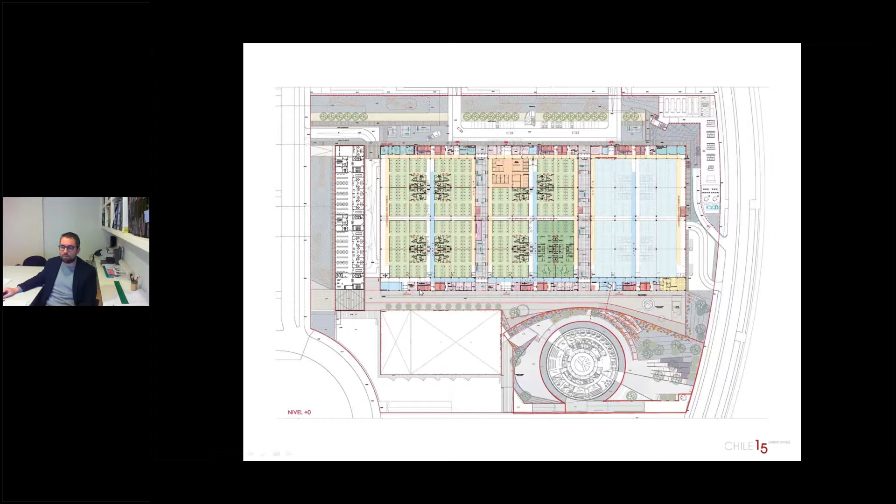These are the communications, marked in red. We have a combination of two pathways where you can see the old corridors and some special reserved space that brings services to the main area, which you can find here in blue.

We have a basement, which is necessary to accommodate all the installations, facilities and some infrastructure, always giving service to the main building. Some part of the basement is also dedicated to the staff.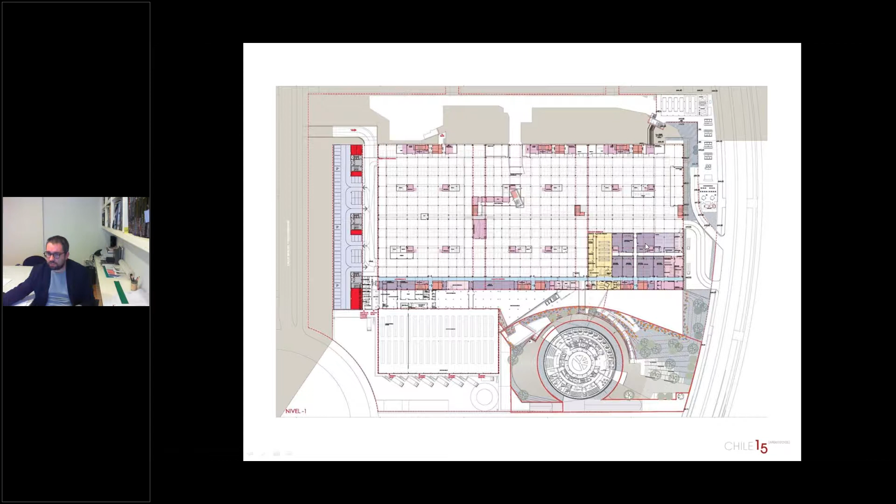And we have, I won't say a first floor, it's just the main level. The first level is just a corridor that brings some administration and other uses, but we have emptied these places, so it's not that we have two floors in reality.

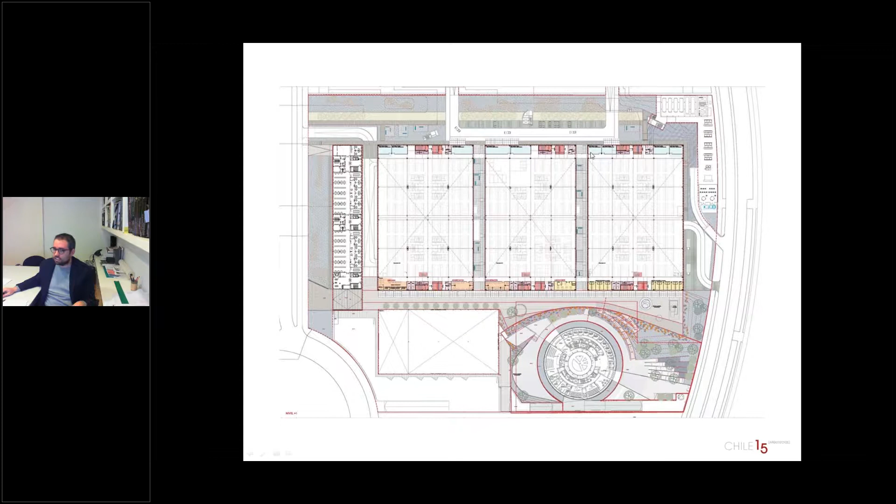Well, when I was talking about design, it implies all agents. So at the same time we were designing the building, we were calculating the building, and we were detailing the building. So once the building, the foundation and the structure is designed and we have the approval, we start solving everything that is coming in the works, in the construction site.

Because as well we are designing, we have to resolve some details, but we have not the time to resolve the details in our studio as a normal project. We don't have time, so we have to be in the site. It's implied different kinds of register of drawings. We have sketches, we have BIM models as well. Everything comes here and some on the construction.

So the main goal, or I would say the main challenge of this project, is all this previous effort that we are doing, and all the people coming together, came in the idea of building the building in time. It's not only a matter of administration, it's a matter of reality that the society needs this building, because we have no time to waste against the pandemic.

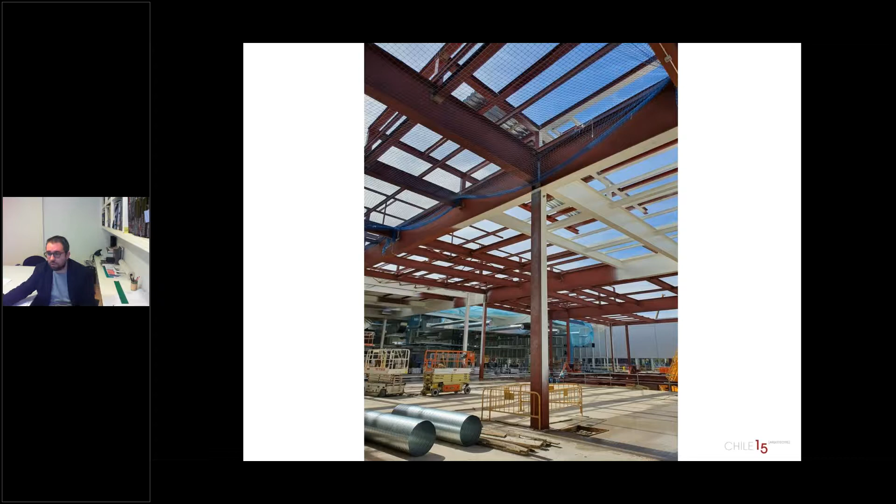We have a high pressure now in Madrid. In time, this building will make a solution in order to make this hospitalization area more functional and to provide space to reduce the impact on the rest of the hospitals in the region.

Eduardo, Michael here. I can see you have many slides still, and we have already a couple of questions. Could you wrap it up in 3 minutes, maybe? Thank you. Sure, I finished, yes.

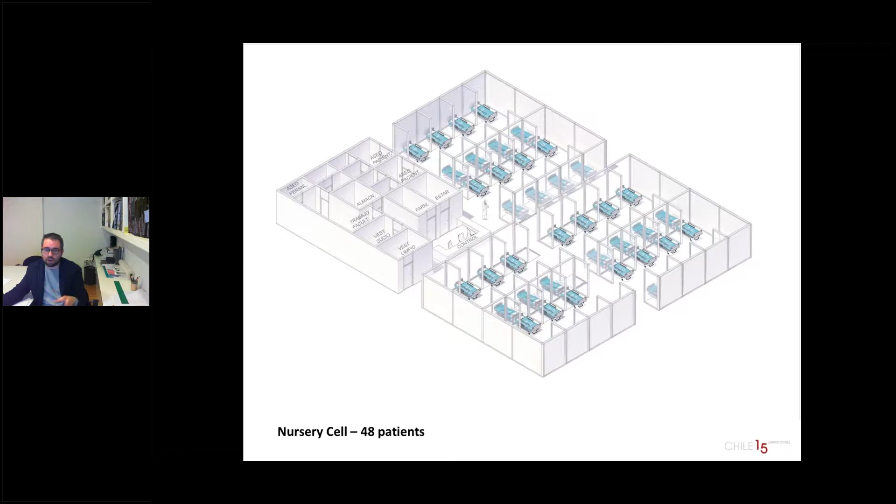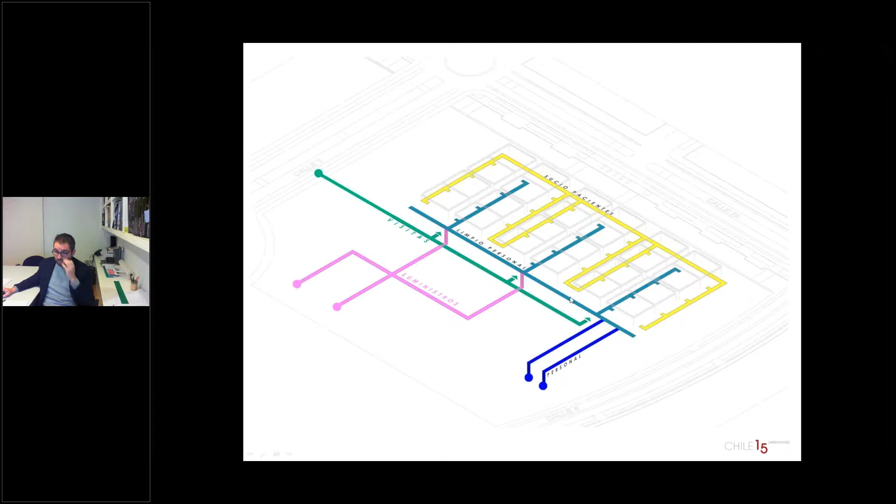We have a public street, we have the clean corridors, we have the dirty corridors here when the ambulances and patients come in, we have the logistics, and we have some corridor for the staff. Well, some point of this is the biggest part of the late part of the presentation.

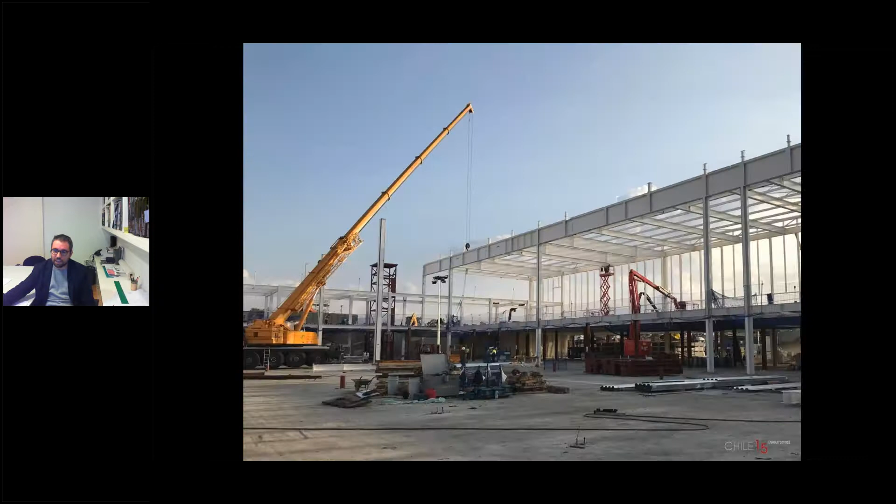It's important to remark the industrialization and steel construction. It's impossible to achieve this kind of building without having the tools and without having the contractors in order to keep this building in time. We are working here with 14 companies, and the hospital building is with 3 building enterprises.

I want to share some photographs of the construction site. We were assuming all this work together, the steel structure as well. As well, we are doing the steel structure. Something is happening in the basement. So we are finishing the basement, we are making the structure, we are building the other part of the building.

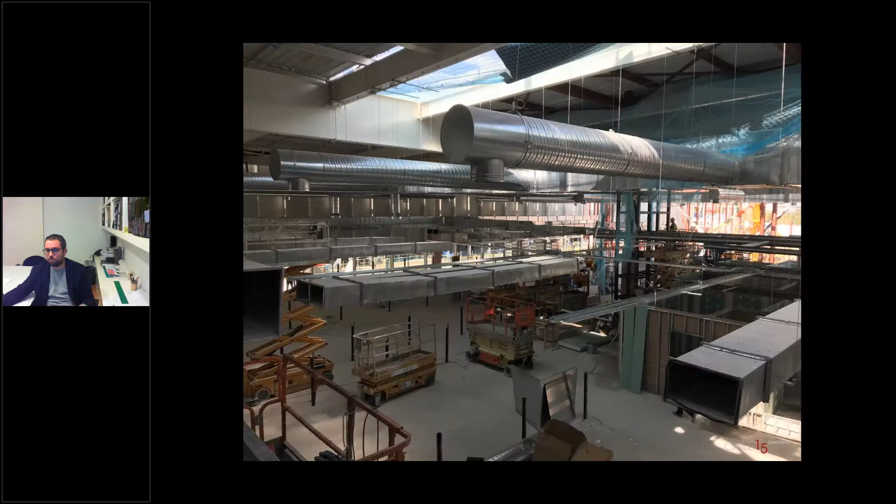It represents very well the idea of fast construction and fast design. We have no time to lose. And of course, with the facade, we have this idea of the glass perimeter and we have the facade, a steel facade, on the top.

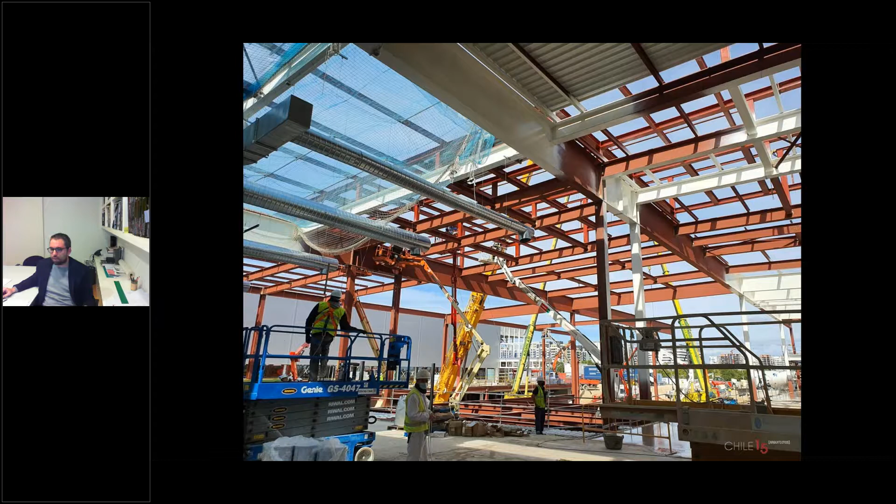We have this, of course, involving facilities of energy renewal. We provide a building that is summing all these efforts together. As you can see here, we are finishing this building structure with the slab. We have this part finished yet, and probably tomorrow it will be complete.

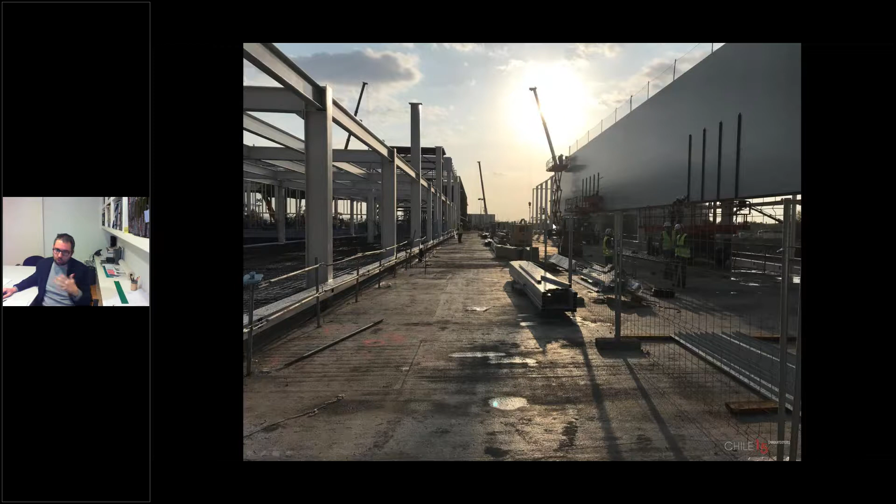Another image that represents very well what I'm telling is the idea that we have some part of the building finished in a way, and we are building the next one, so everything is happening at the same time. We are very fast in a way to achieve the goal.

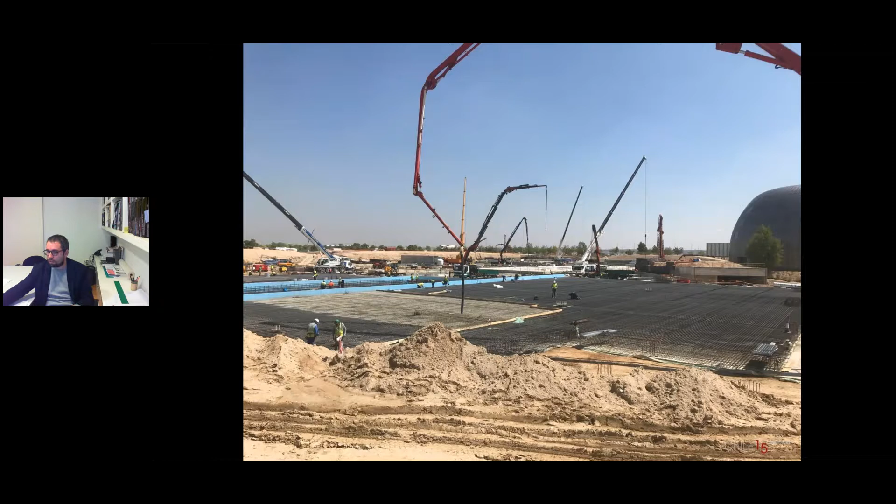We started in June of this year. This was more or less the area of making the slab, and 4 months later, we can assume that the building is almost complete, and we expect to finish it this month. And this is, many thanks for all.

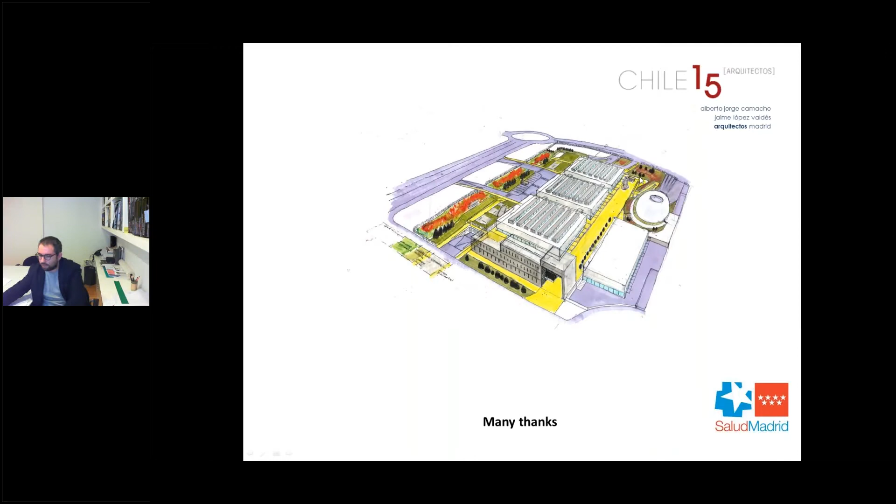Thank you very much. Yeah, I know this is a little bit in a rush, but I wanted to explain a lot of things. Thank you.

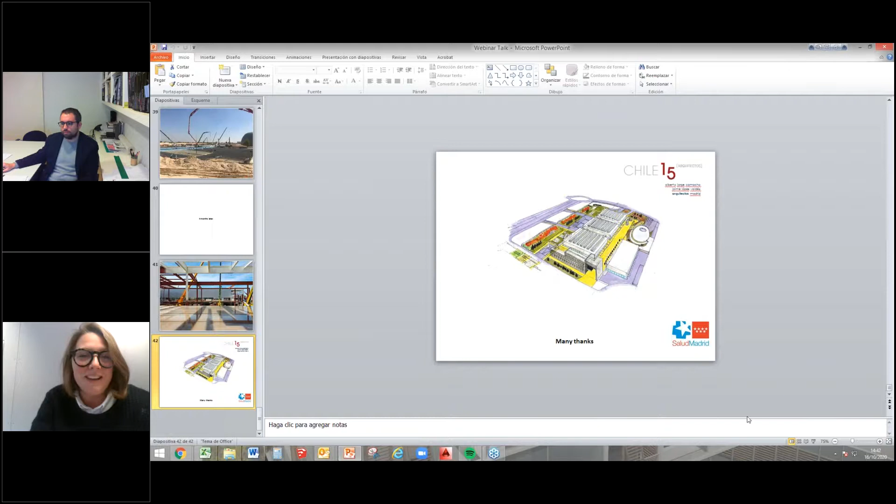Thank you so much, Eduardo. It was a very interesting presentation, and we got a lot of questions both on the chat, but I also got on my private Slack account, people that have been asking questions that I should ask you. Unfortunately, we don't have so much time. I might email you some questions after, and maybe we can share with the audience. Thank you. And now we go to the poll questions. Okay, thank you.